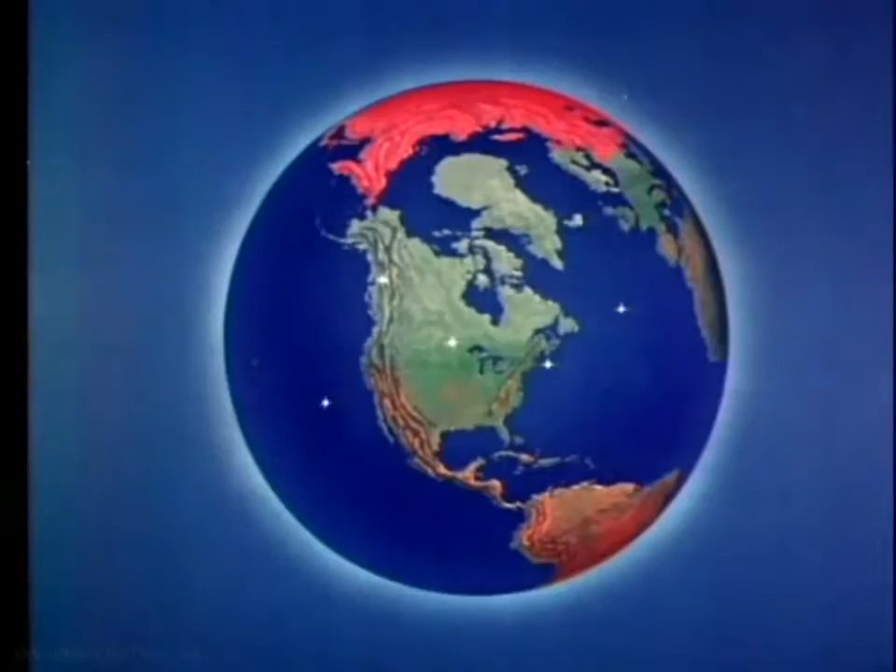Sprawled across North America, from the polar ice cap to the Mexican border, is a giant with 1,000 eyes. Day and night, fair weather or foul, he guards his homeland. This giant is the air defense system of North America, a vast and intricate maze of radar networks. Through the electronic eyes of this giant, we are able to see the enemy before the enemy sees us.

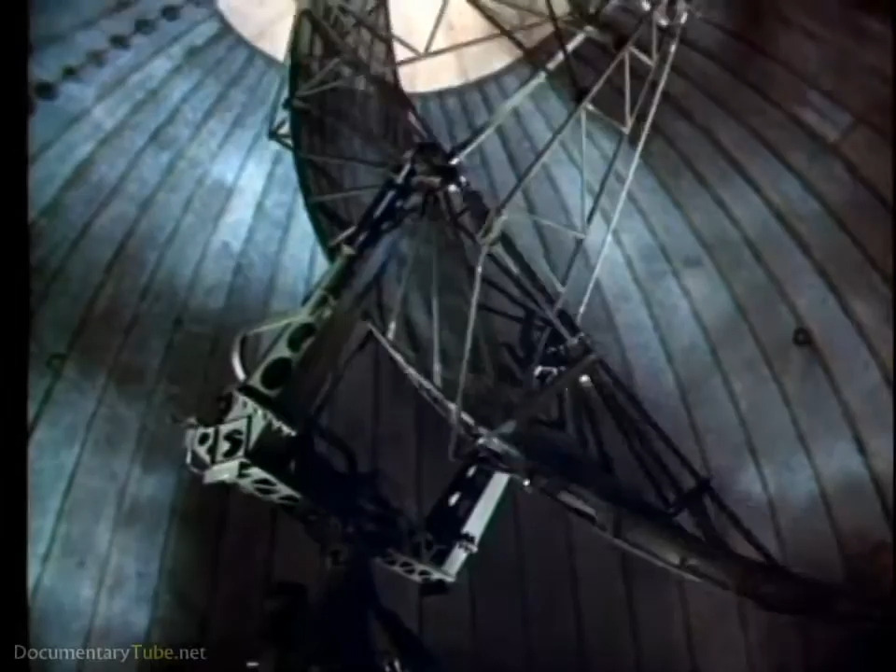These radars never sleep. Round the clock, they stand ready to do their part in minimizing the penetration of enemy bombers. And round the clock, their quietly pulsing hearts, the magnetrons and the klystrons, help generate the power for peace that keeps America strong.

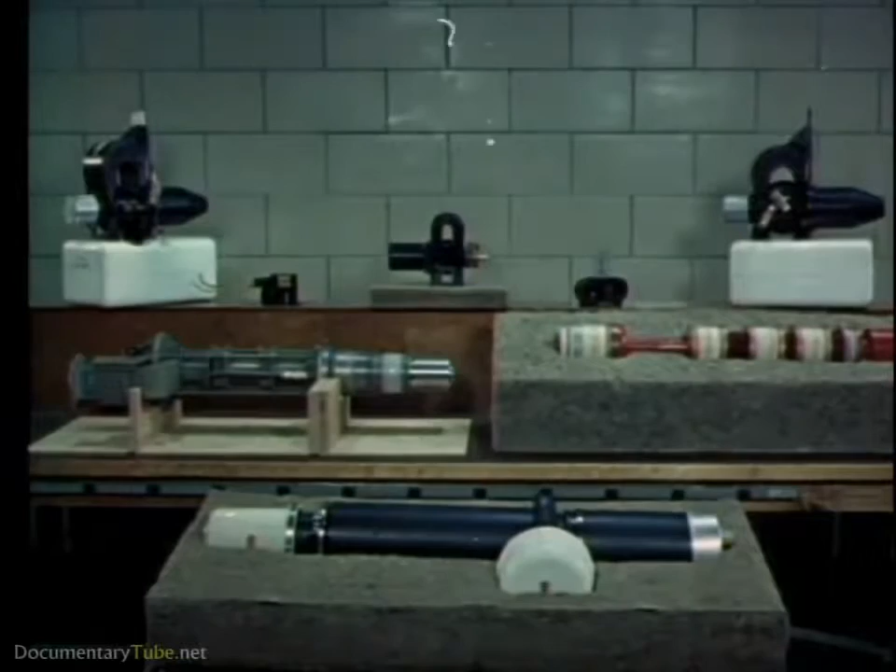These microwave power tubes, the magnetron to generate the radar signal, the klystron amplifier for radio communication, and radar are the subject of our story.

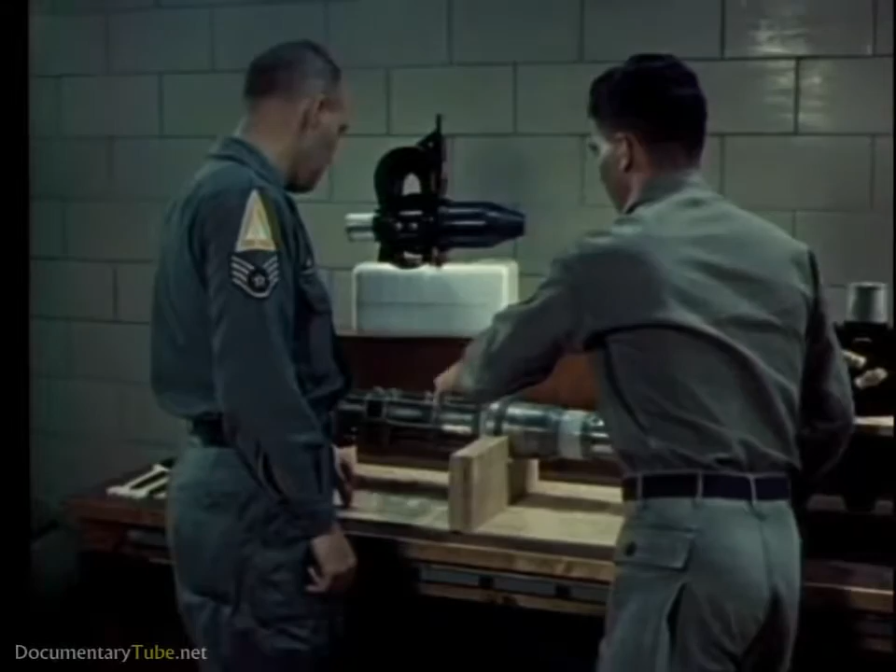It is a story about these vital tubes, but even more about you, the men who work with them. When you have a well-trained maintenance man with a well-adjusted radar at a well-chosen site, then you've really got a winning team.

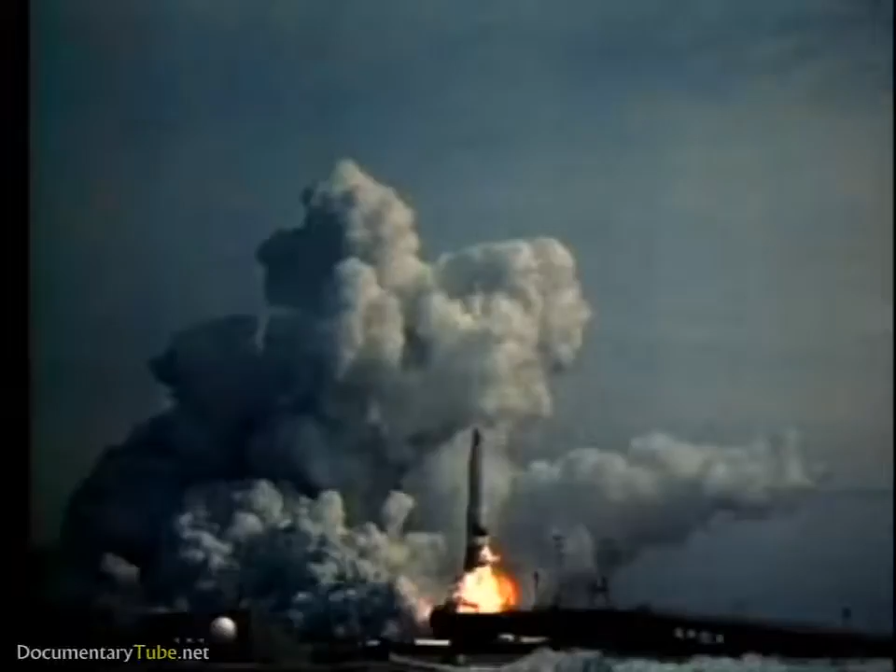They keep the airborne radars operating and ready for crucial missions. In missiles that depend upon radar for guidance. In bombers that depend upon radar for bombing and navigation. In interceptors that depend upon radar for fire control. And in reconnaissance and search aircraft that depend upon radar to extend their vision.

Years of scientific research and millions of dollars worth of equipment have gone into this aircraft. But only if the maintenance men keep the radar functioning can it complete its mission. When something goes wrong, they've got to make a quick decision, whether to attempt repairs in flight or abort the mission.

There's trouble here, that's for sure. But what kind of trouble? First, they check the radar scope presentation. Sometimes this gives a clue.

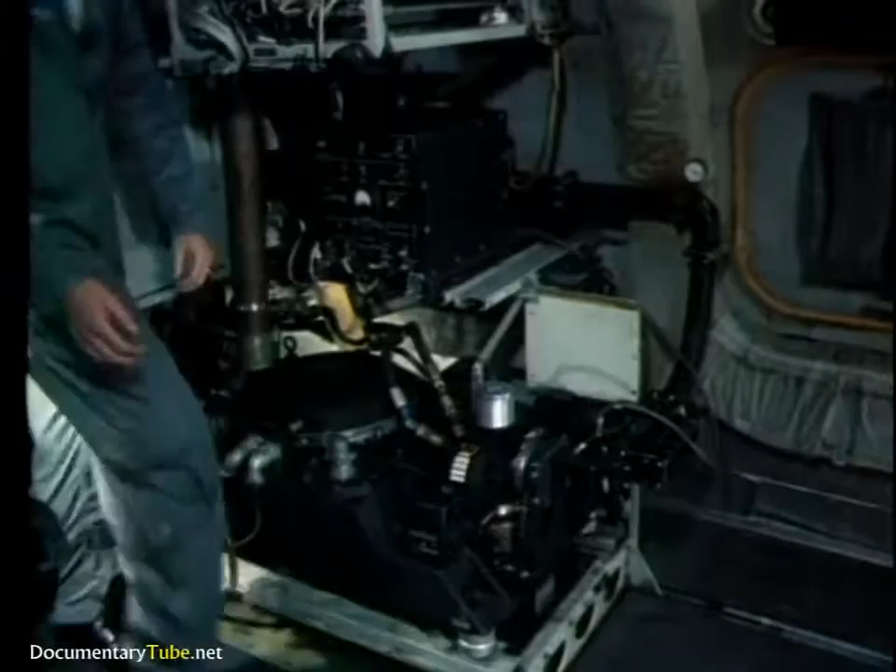The cause might be moisture in the waveguide, corrosion, dents, or scratches. Another trouble spot could be the pressurized antenna system. Loss of waveguide pressure will also cause arcing. Yes, the pressure's low. This is a danger signal. If this arcing continues, the magnetron output window may be damaged, the tube's vacuum lost, and the magnetron destroyed.

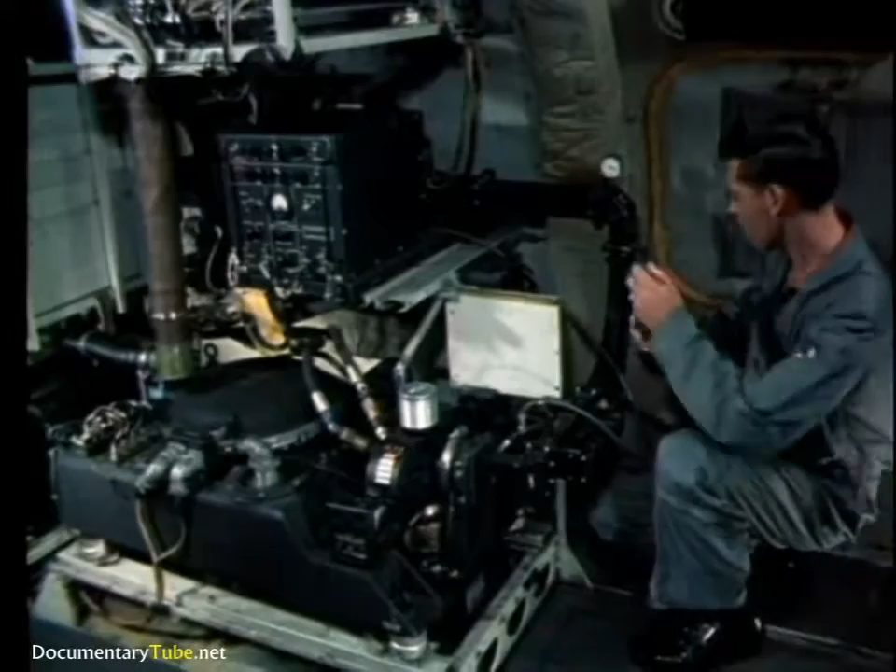Waveguide joints should be tested to make sure they're airtight. This man is making a liquid soap test. See where the bubbles are forming? He's found the trouble. But how serious is it?

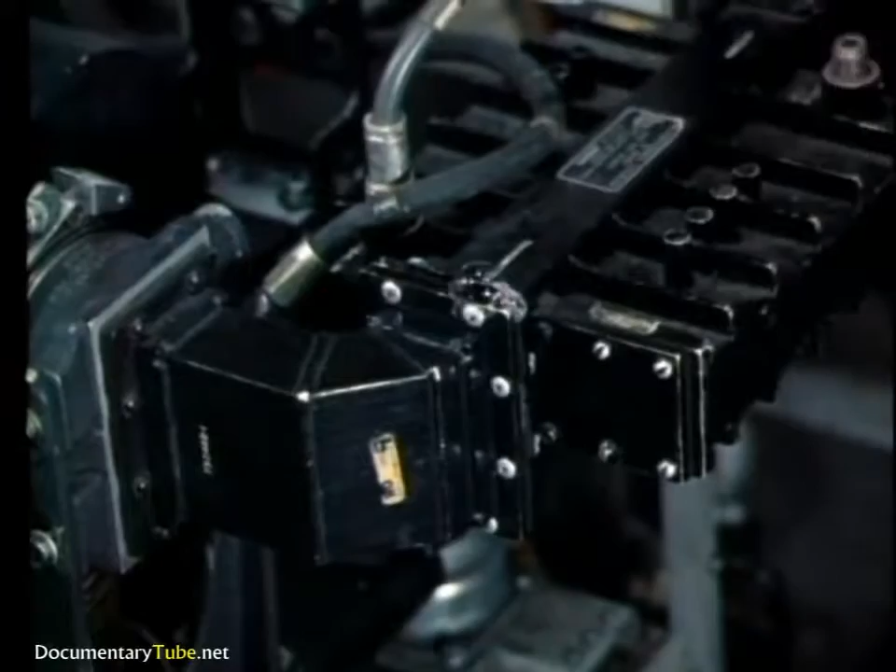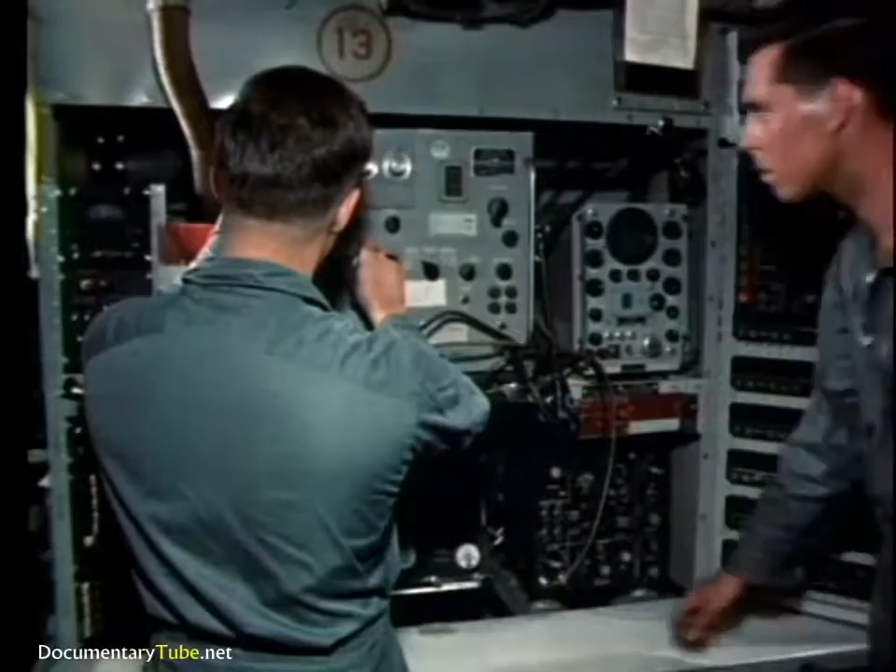He checks the spectrum analyzer again. It looks bad. See how the pulse has changed? Finally, the main pulse deteriorates completely. Bad news. The magnetron is seriously damaged. It's beyond repair. This means shut down the equipment and get ready to install the spare.

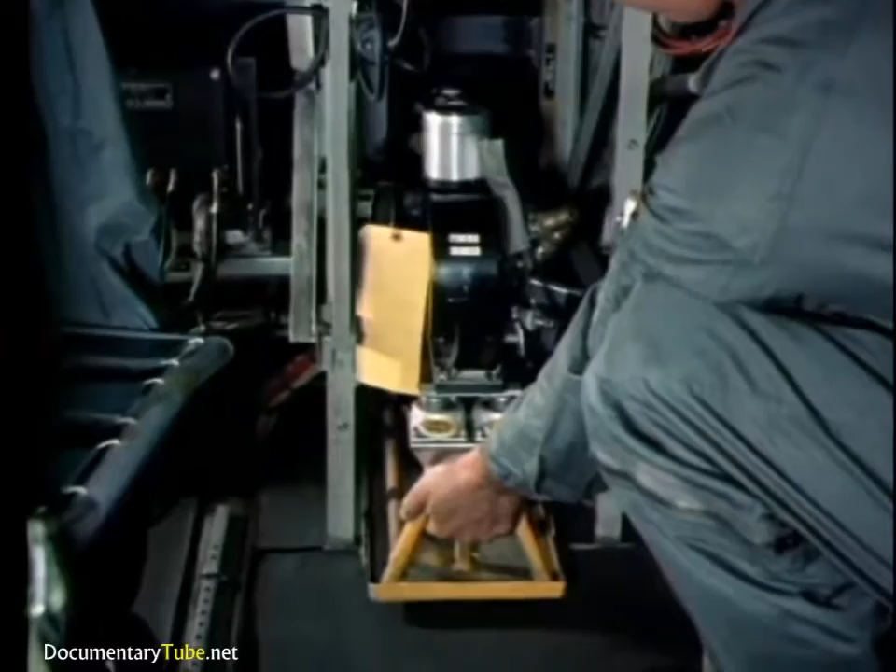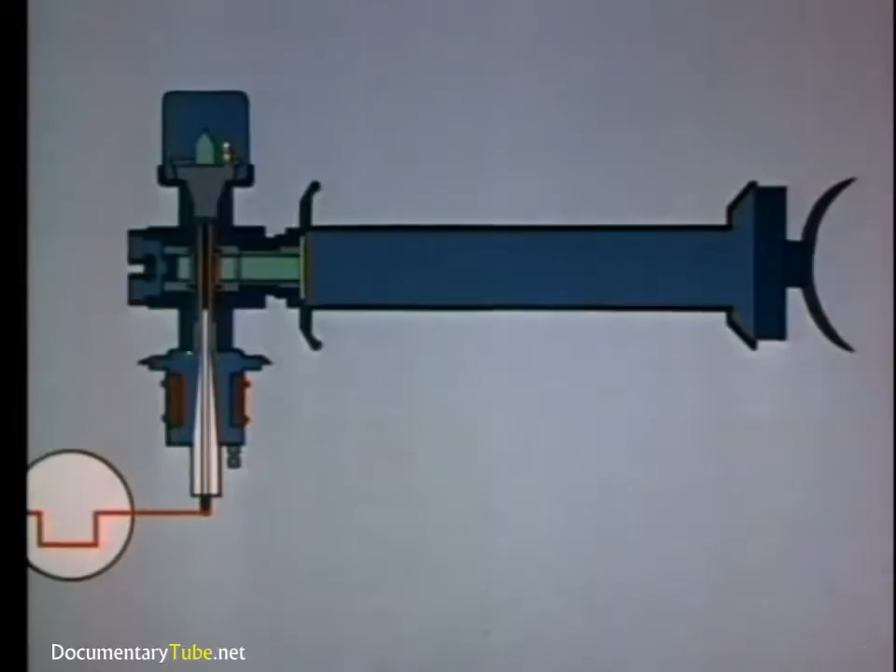While they're working, let's take a look inside the magnetron. Animation shows what caused the malfunction. We'll turn time back a few hours and show the Maggie functioning normally. As the pulse from the modulator is applied, the Maggie produces radio frequency oscillations to form the radar pulse.

This energy is then coupled into the waveguide and directed to the antenna for transmission. Energy is reflected back along the waveguide toward the magnetron. Normally, when the antenna system is in good shape, the reflected wave won't be strong enough to cause arcing at critical points.

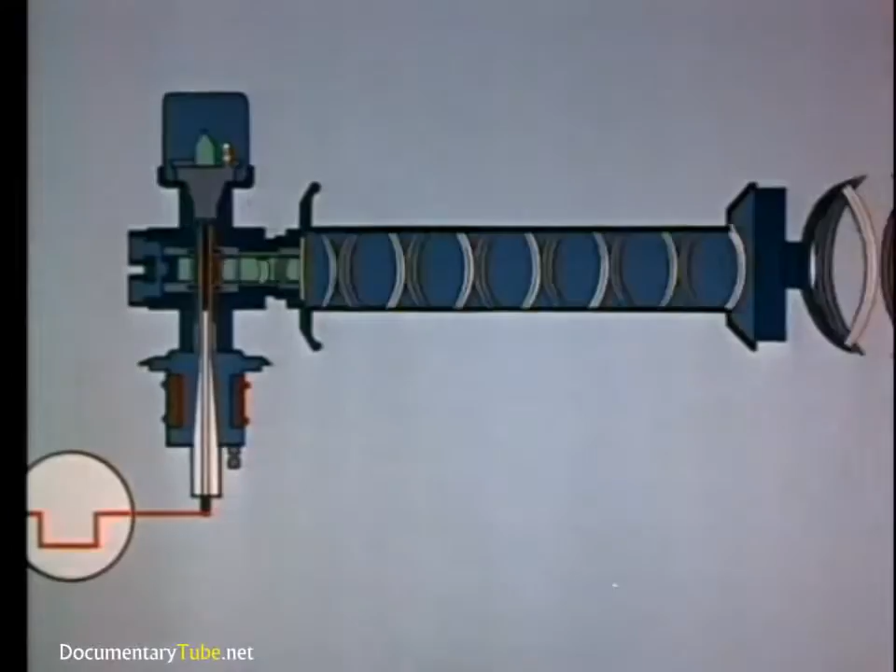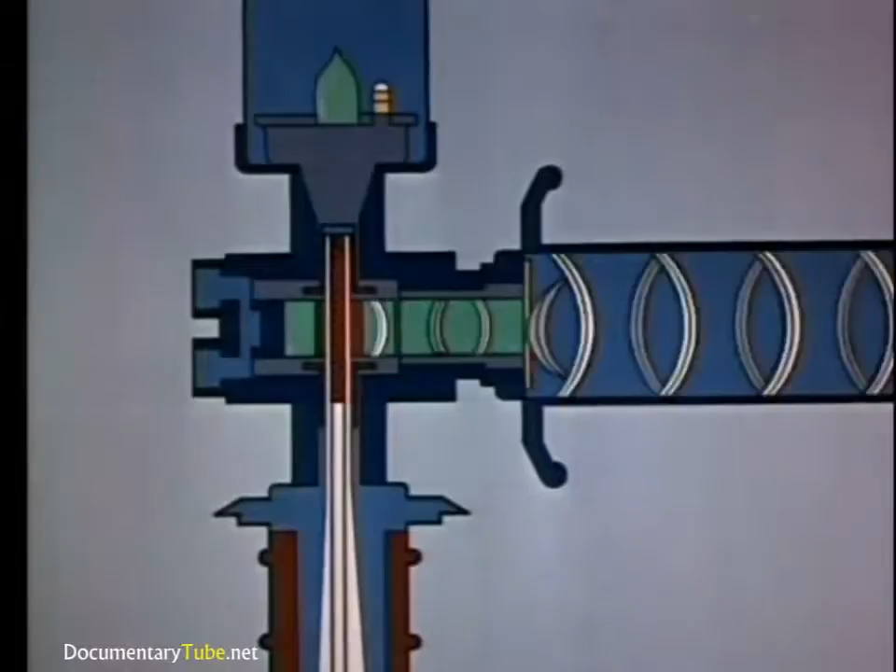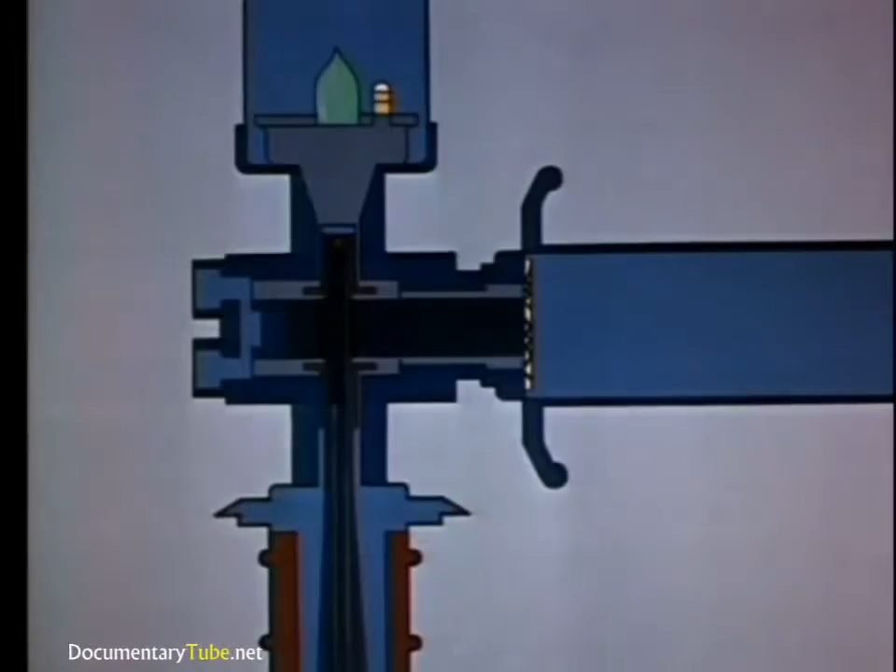But as conditions such as loss of waveguide pressure develop, the antenna characteristics change and the reflected wave becomes greater. Then arcing may take place at the point where the radar wave leaves the magnetron, causing the magnetron output window to crack or puncture. As the vacuum is lost, the heater oxidizes and burns out. The cathode cools. Air seeps into the interaction space, and arcing occurs with each pulse.

After the magnetron has been unbolted, the filament and cathode connections are uncoupled. A large magnetron like this one requires 2 men to handle it safely.

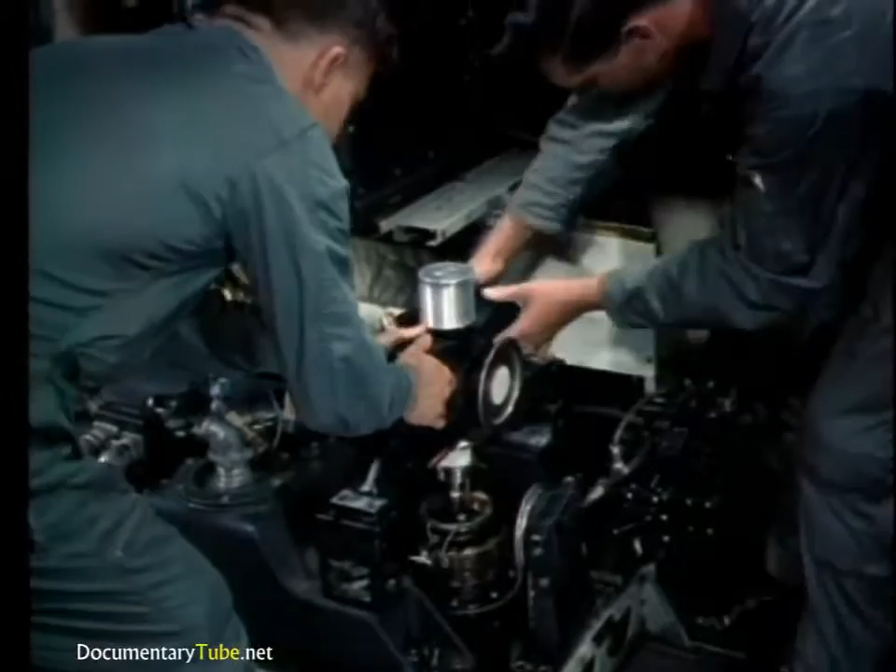Before a Maggie is replaced, all connections, mating flanges, and sealing surfaces should be inspected. Insulating oil should be examined for foreign matter. Damaged or worn gaskets should be replaced.

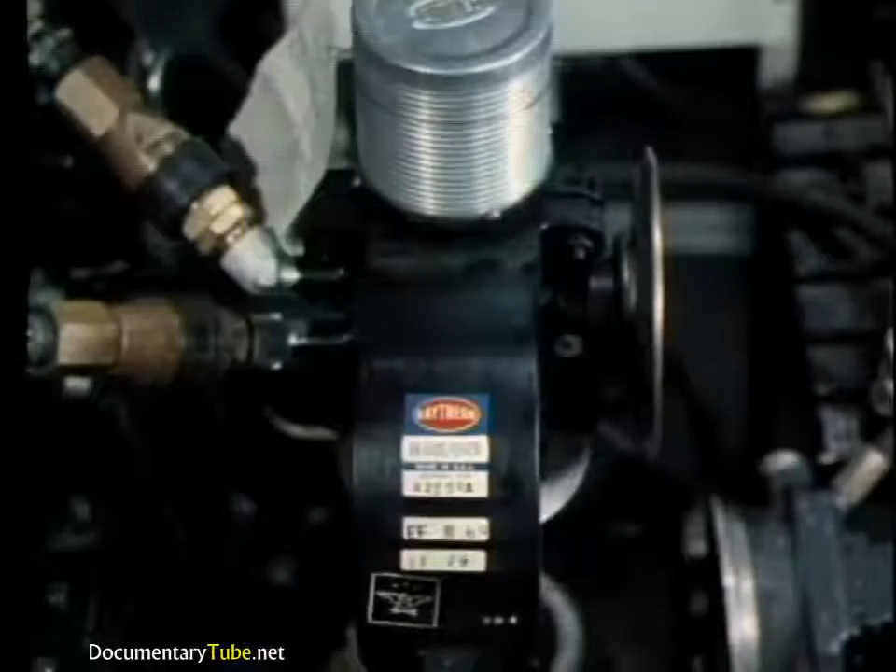Heater's supply voltage should be established at the value marked on the tube. Later, when the plane returns to base, the heater voltage should be double-checked with an accurate instrument.

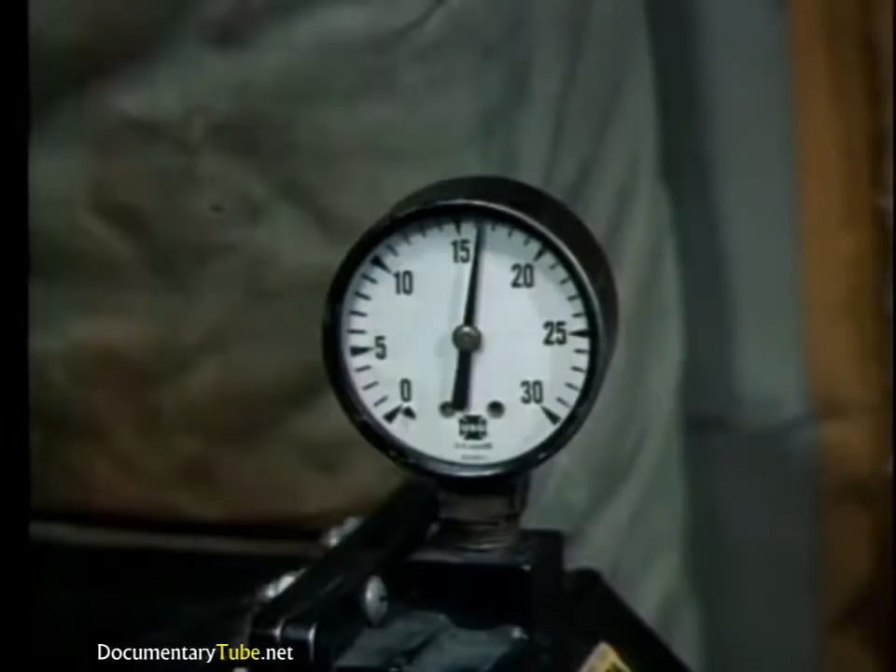Now that the spare magnetron has been installed, further tests are necessary. The technician must make sure he has the required pressure and that there are no air leaks. Instructions concerning the care of pressurized antenna systems will be found in the appropriate tech order handbook. The liquid soap method is a simple way to check for pressure leaks and may be used where more accurate means of testing are not available.

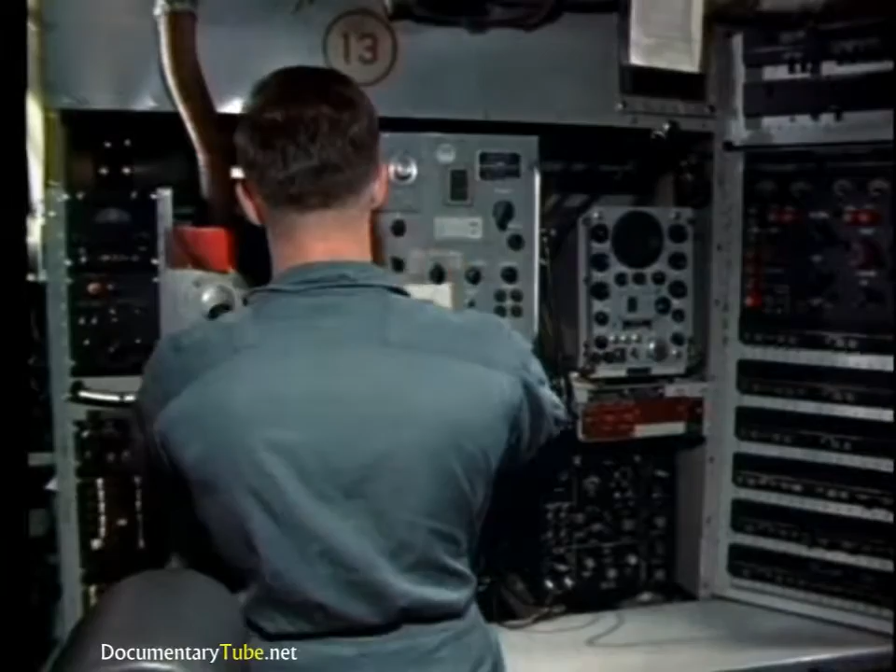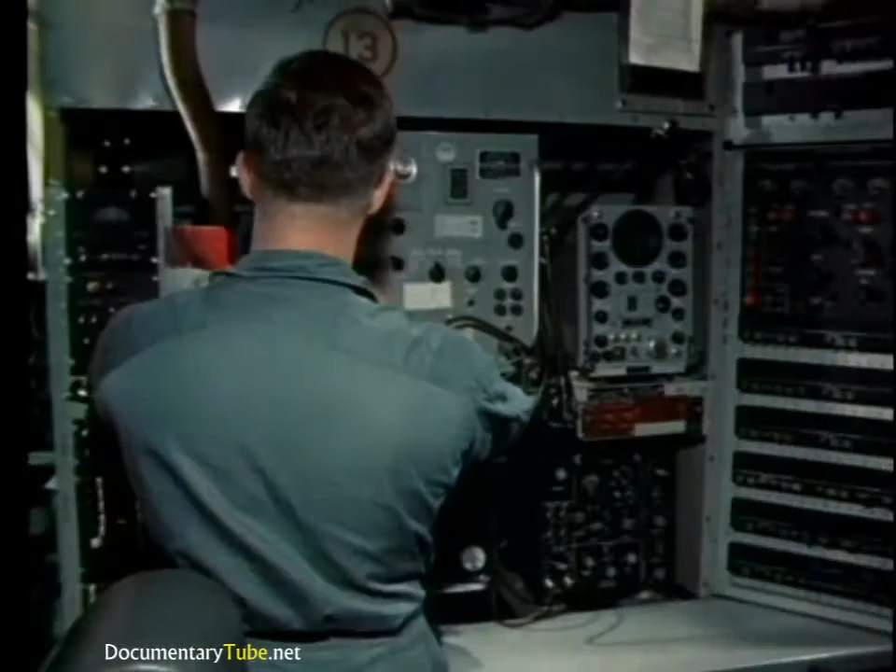Test equipment is used to analyze the performance of a newly installed tube. The output pulse is checked on the spectrum analyzer. See how the large hump or main bang is symmetrical and sharply defined. The side lobes are relatively small. A presentation like this means that the Maggie is firing properly.

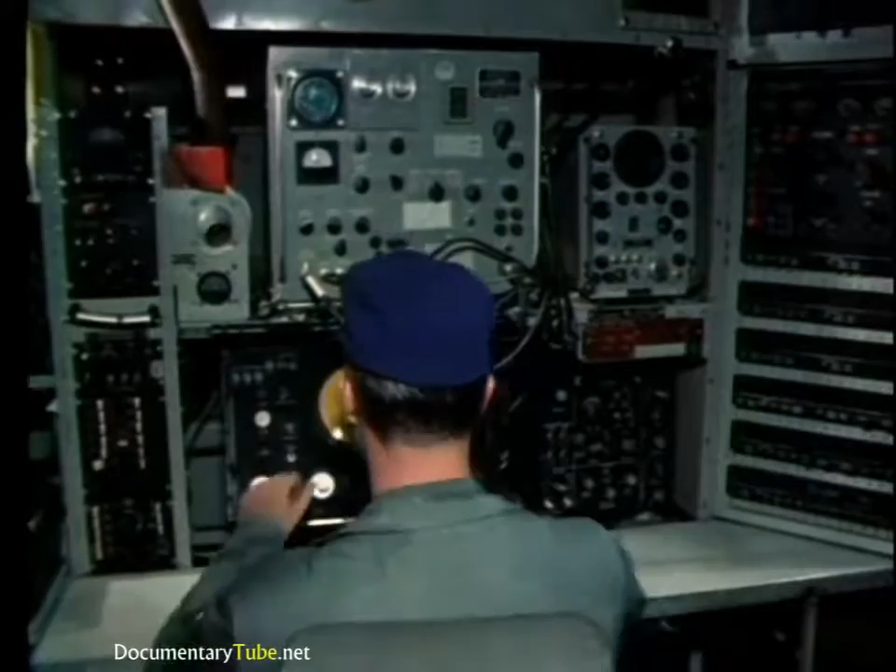Not only that, it means that these technicians know their jobs. They were able to analyze the trouble correctly and replace the magnetron in flight. Because they knew what to do, this aircraft was able to complete its mission.

Let's take a closer look at these microwave power tubes. Magnetrons costing from $100 to $10,000.

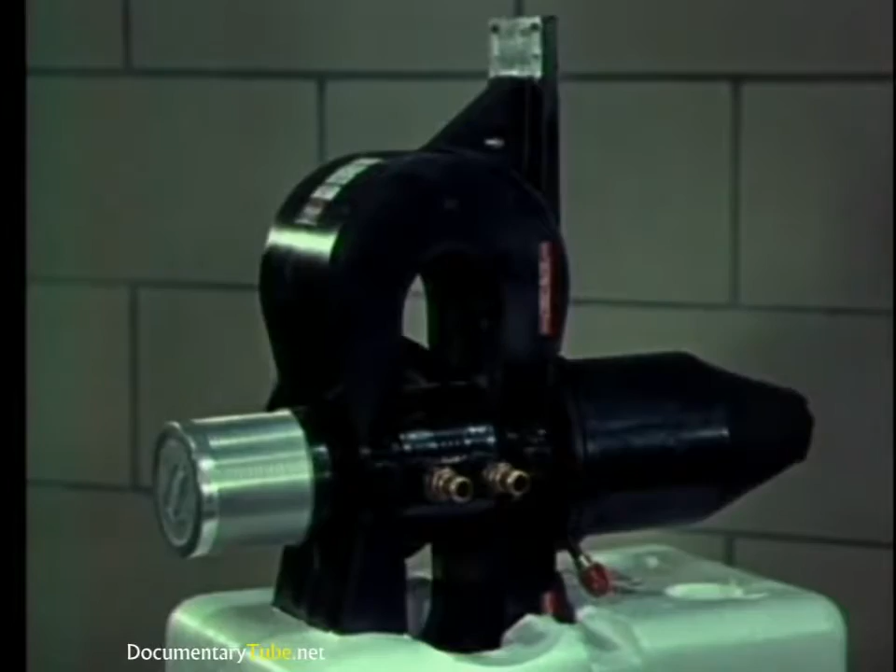Klystrons costing from $1,500 to $25,000. Why so expensive? Let's see what's inside them. Look at this. Parts so critical, they must be inspected through a microscope.

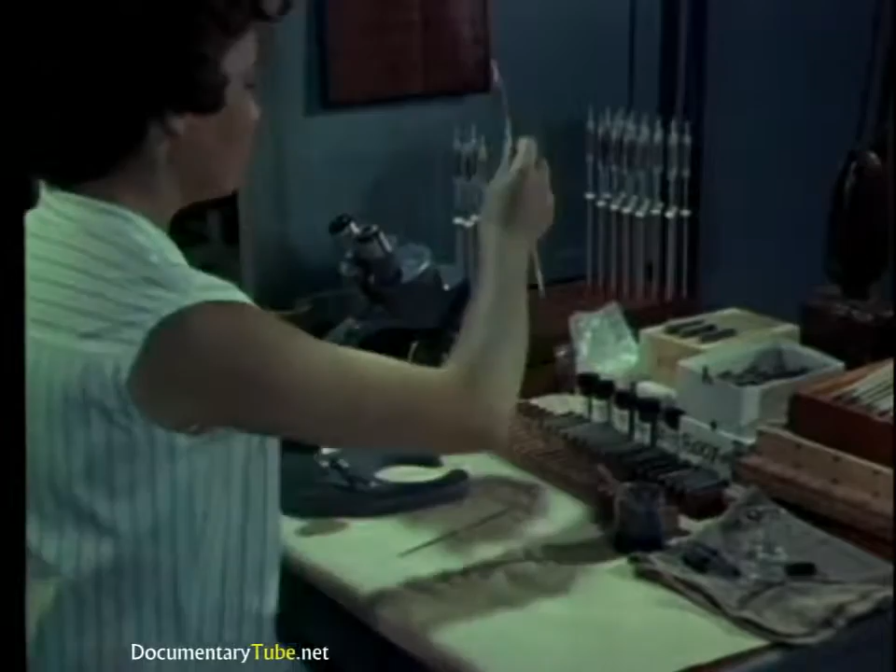Tolerances accurate to 4/1000ths of an inch. To build them to such close tolerances requires involved manufacturing processes. Specialized parts must be carefully assembled.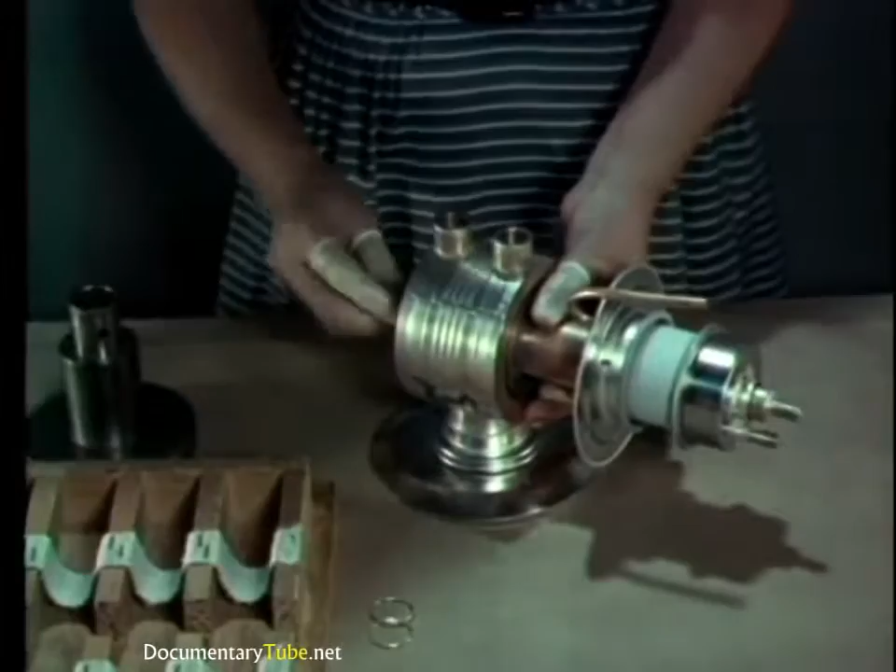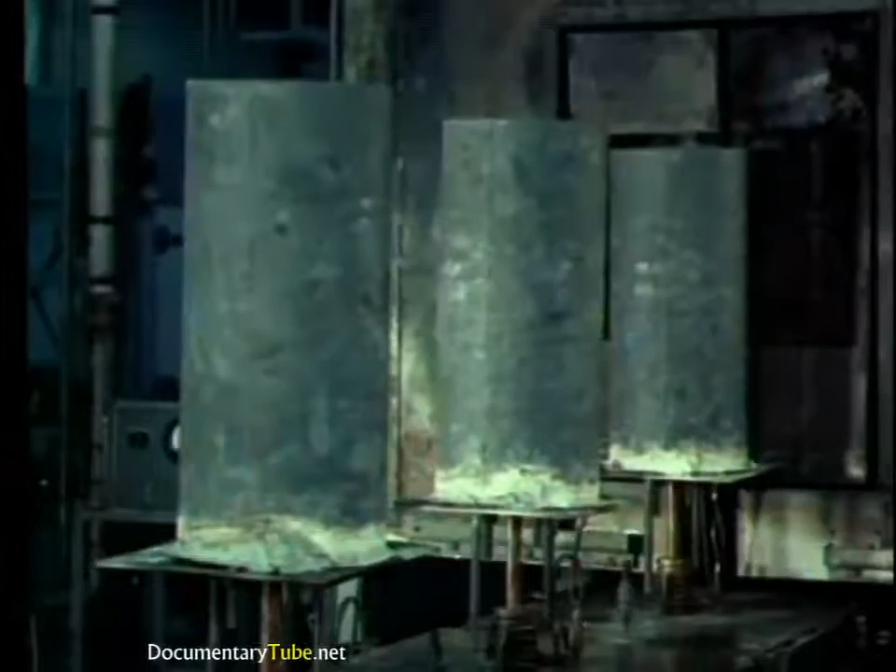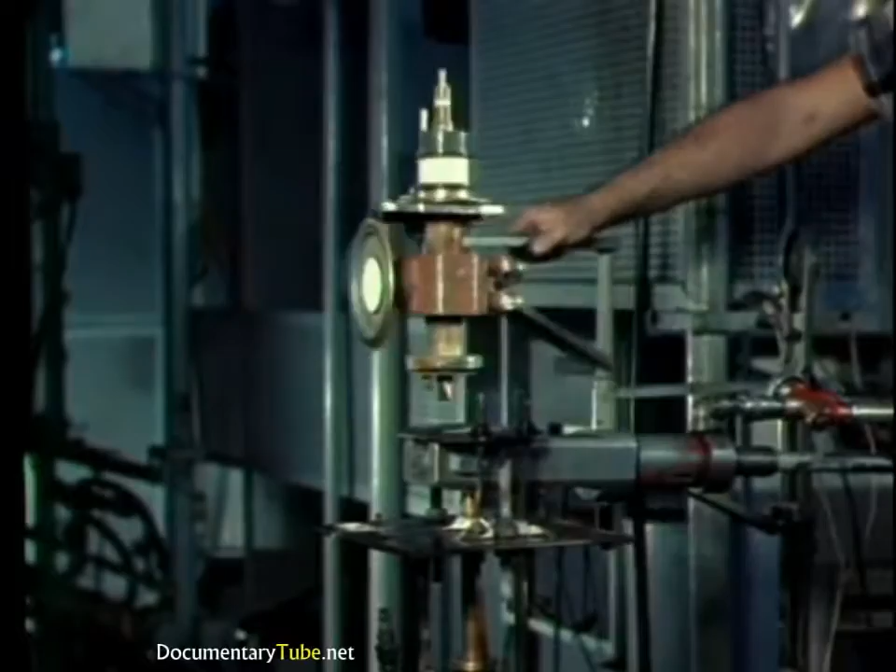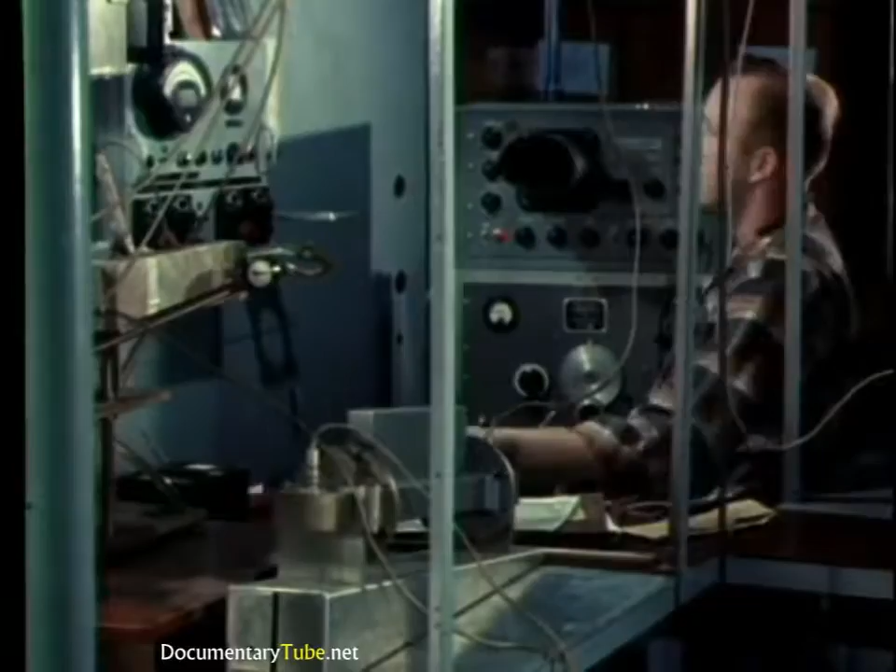The completed assembly is heat treated to bake out gas molecules, so that they may be removed by an evacuation machine. External mechanical parts, such as couplings and magnets, are installed. The final step is rigid testing of electrical performance to make sure it meets the high standards required.

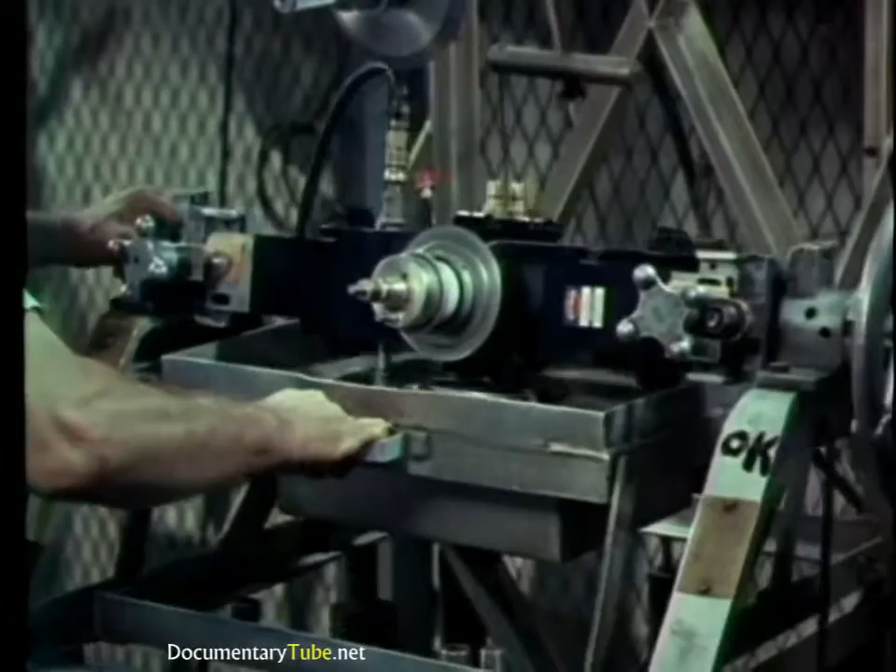Pressure tests ensure leak-proof connections throughout. Now the tubes can be put into storage. Even here, should tiny defects develop while on the shelf, continuous sample testing will reveal them. Before shipment, the delicate tubes are carefully packaged. The quality designed in during research, built in during manufacture, maintained by rigid testing and careful storage, will reach the user intact.

Here are a few basic rules on proper handling. Always use 2 men to lift a heavy tube. A portion of a carton makes a good tube stand, protecting delicate parts from damage. But a wooden rack is better and lasts longer.

Save all the cartons and packaging materials. Use them to return defective tubes to the factory.

Magnetrons should be separated at least 12 inches, then their magnetic fields won't interact. Don't store them on steel shelves or they may be degaussed. Don't use steel tools. Use non-magnetic tools. Following these simple rules will save time and trouble, prevent damage, and save the Air Force many thousands of dollars each year.

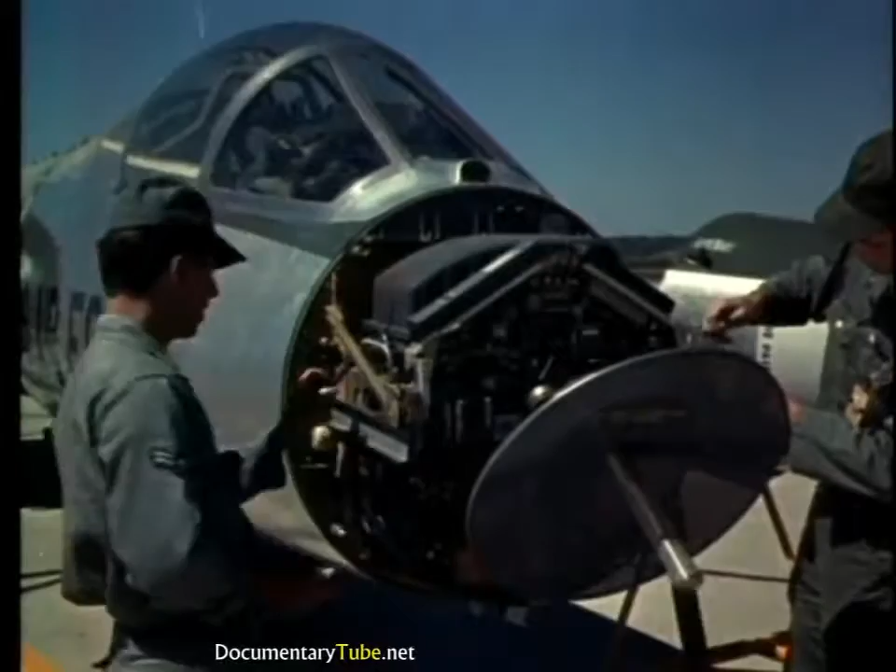On most of the smaller high-performance aircraft like this one, it is not possible to do in-flight radar maintenance. Therefore, most of the work must be done in the electronics maintenance shop. This aircraft has just aborted an intercept training mission. The reason: radar malfunction. Had this mission been the real thing, an enemy bomber could have broken through our defenses.

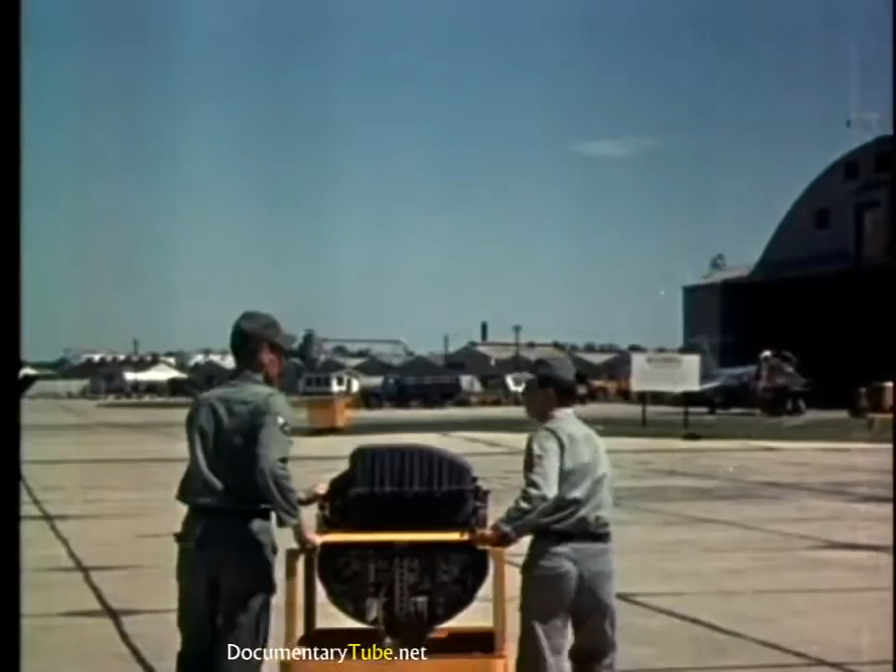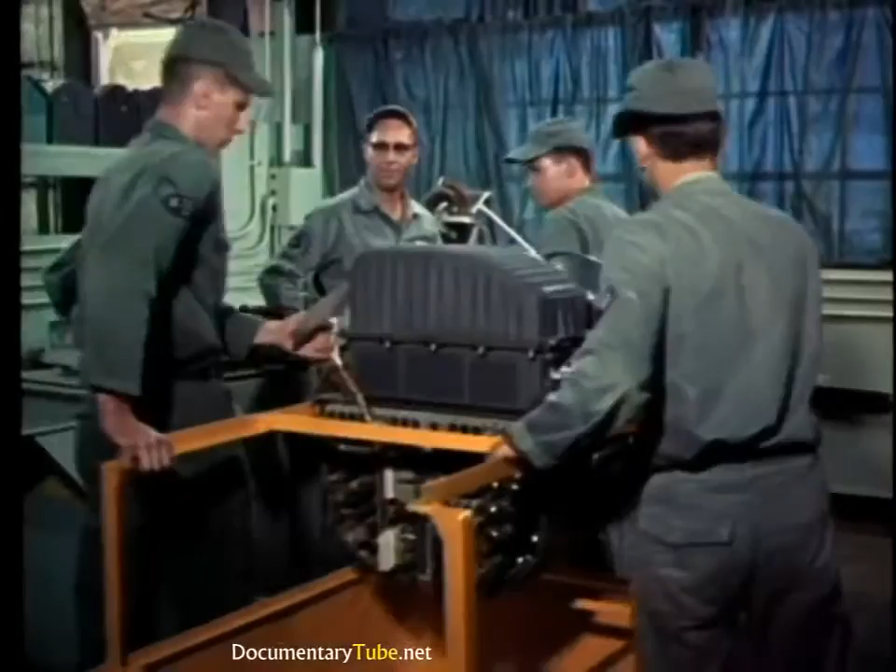The maintenance man's job is to find out why the radar malfunctioned and correct the trouble. You'll see that although these radars come in smaller packages than those on larger aircraft, they are just as big a maintenance problem. The maintenance supervisor is in charge of this work.

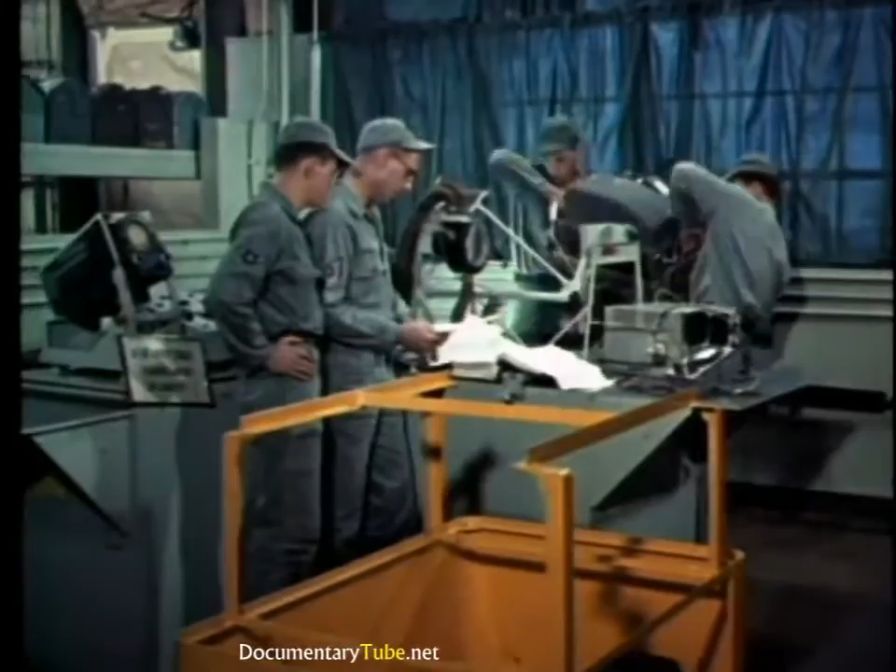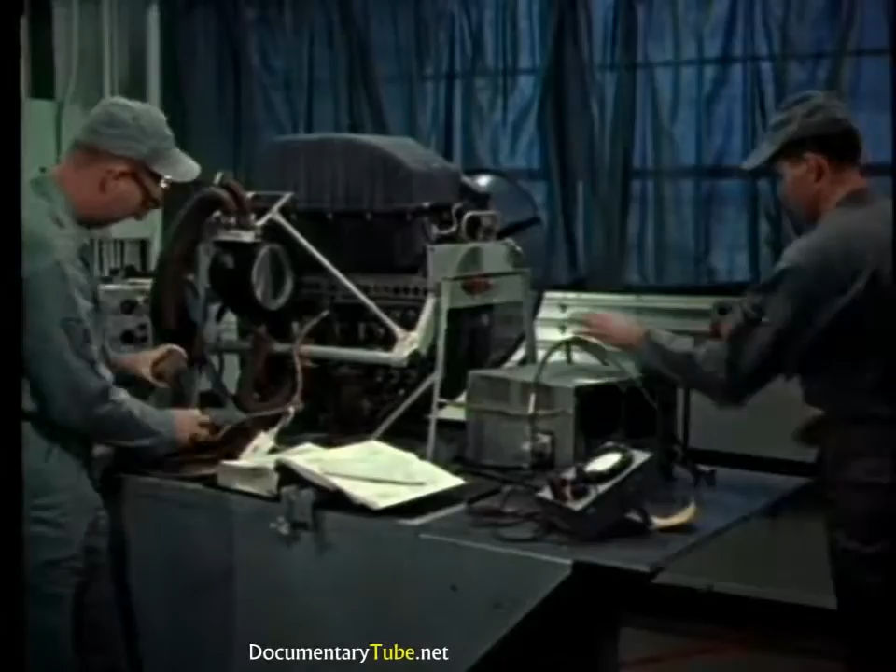Before teardown of a defective black box is started, the operational defect should be identified or at least isolated to a particular sub-chassis. The pilot's report on the radar failure may give a clue. Comparing the report of malfunction with equipment handbooks may also help to isolate the defect. But the best aids to repair are the analytical approach of the technician and the special test equipment he uses.

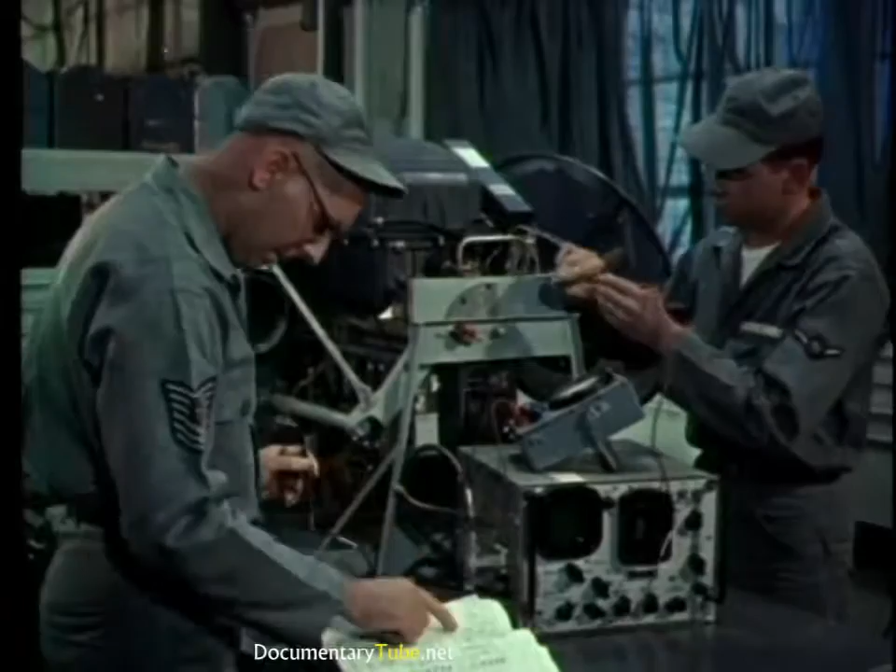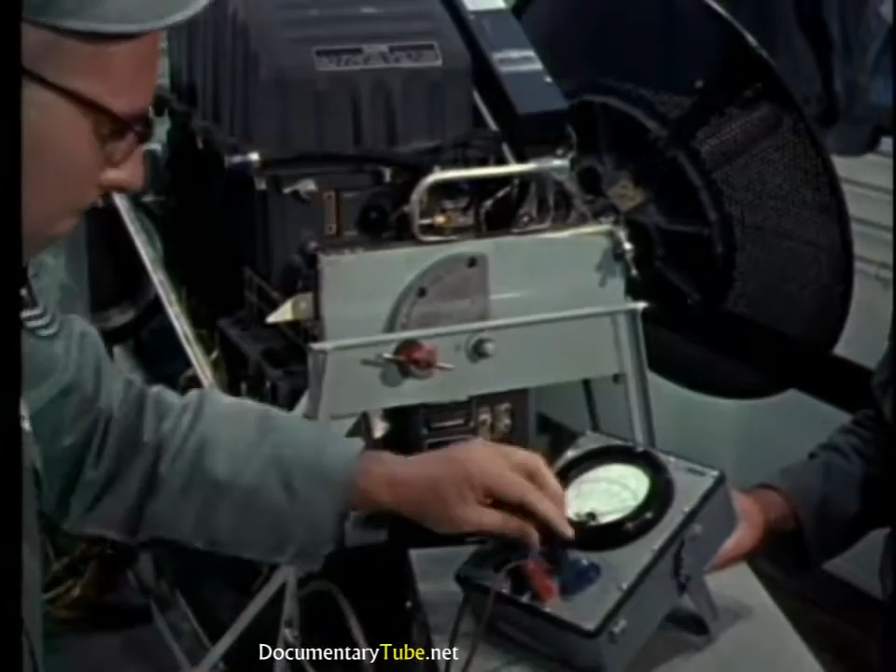An important point to remember is that the transmitter malfunction may be caused by parts other than the magnetron. Wherever possible, other circuit components should be checked before power is applied. A simple resistance check will often reveal a short circuit. That's what the trouble is here.

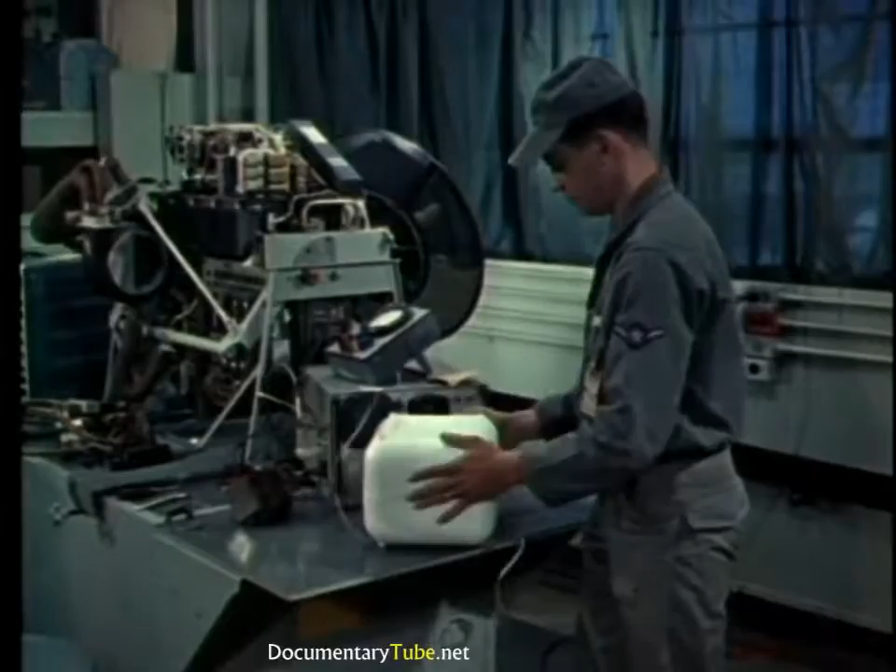The airman will carry on from here and trace the short circuit. So far, so good. He's found a shorted filament transformer and replaced it with a new one. But what's this? He's decided to change the magnetron, too. The supervisor disagrees. Tube swapping is not a good idea.

The old magnetron should be thoroughly tested before any decision is made. Testing showed that the old magnetron should be replaced. This has been done. Now let's see how the new Maggie behaves. This is confusing. The spectrum analyzer shows arcing.

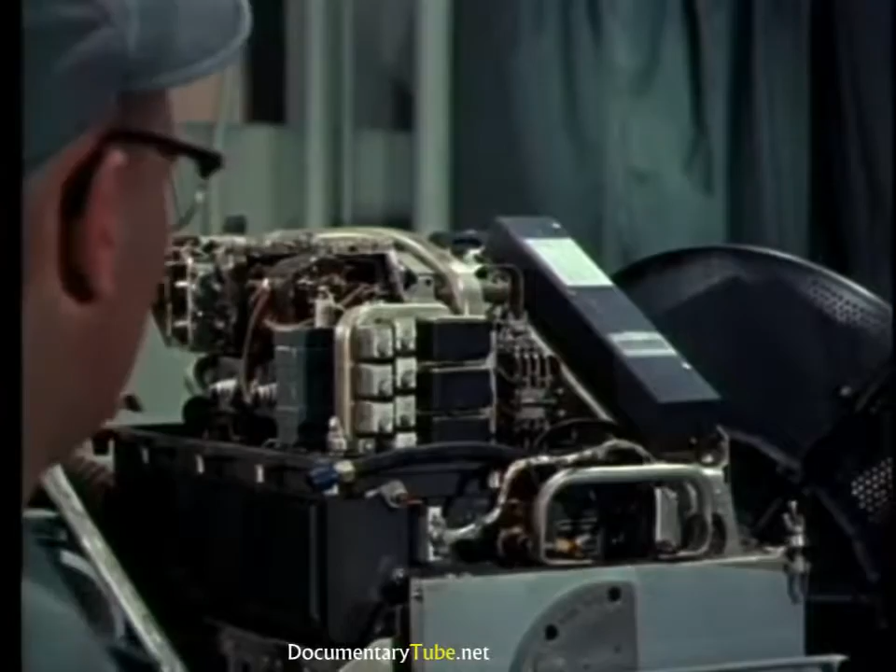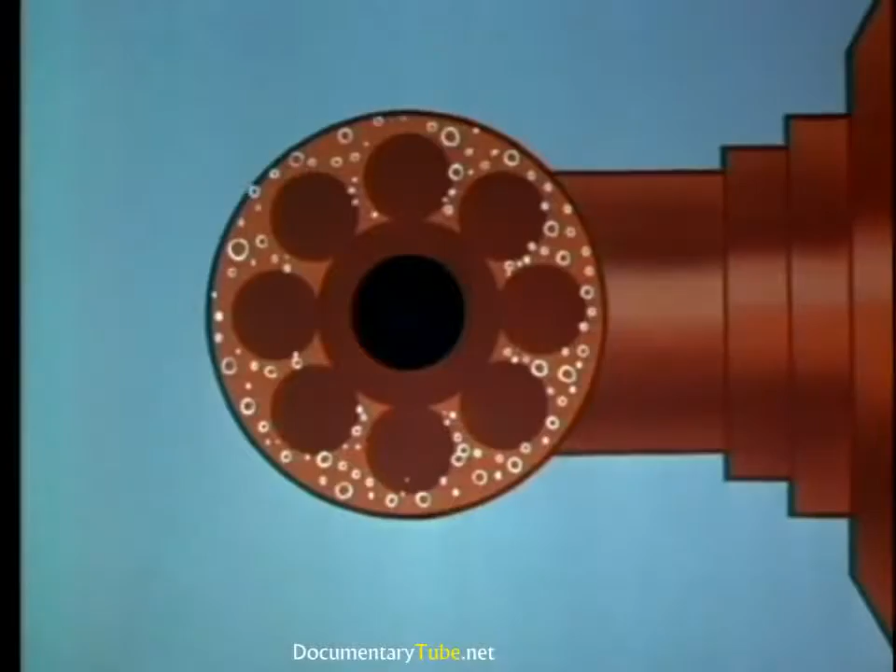Let's look inside the tube and see what's causing it. Magnetrons are made of porous metals, which usually trap a small amount of residual gas. During storage, gas molecules migrate into the interaction space surrounding the cathode.

When the tube is installed and power applied, it will operate normally if the gas content is low. But if gas content is high, arcing will occur with each modulator pulse. This arcing might be mild or severe. Frequently, tubes with residual gas can be restored to normal operation by a suitable break-in or seasoning period.

During break-in, the gas molecules are driven back into the walls of the tube, and normal operation resumes. If the equipment is operated frequently, normal operation should continue throughout the life of the tube. Occasional individual arcs may also be noted in a normal tube which does not contain gas, but this behavior is due to transient conditions and should be considered as normal.

All new tubes which display arcing when they are first installed should be thoroughly tested and analyzed before being discarded. This will save the government both time and money.

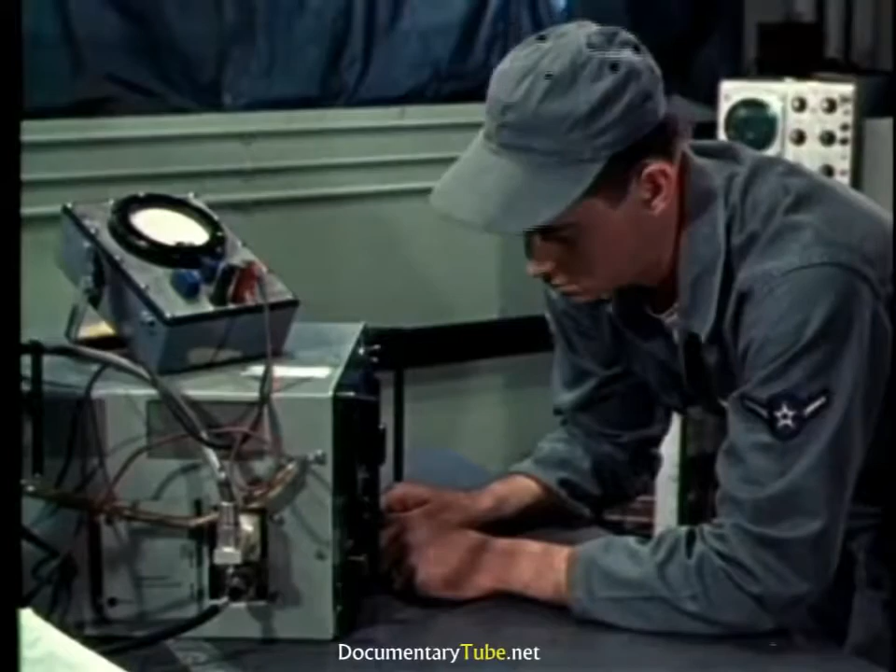The repairs are finished. Now comes the break-in procedure. Proper break-in can clear up various degrees of internal arcing. But watch the spectrum analyzer carefully. If frequent arcs occur, switch to standby immediately.

Small magnetrons may be damaged if severe arcing is allowed to continue more than 2 seconds. Now the range selector switch must be changed to short pulse before the magnetron is operated.

If only sporadic arcing occurs, the operation may be continued. But a series of arcs may cause the overload to pop. In this case, reset the switch and continue the break-in.

To avoid possible damage during the break-in, the technician should keep a close watch on modulator tubes and other components of the RT unit. The time required for break-in will vary with the tube, conditions, and methods used, but normally break-in can be accomplished in 20 to 60 minutes. When break-in is complete, and only infrequent arcs or misfirings occur, operation may be regarded as normal, and the equipment made ready for service.

In addition to the airborne radars, there are a great many ground radar sites scattered about the continental United States and Canada. They are found in almost every type of American scene: in the dusty expanse of the plains, in the northwoods, the heat and humidity of the deep south, in the rolling farmlands of the Midwest, and the salt water scenes of our coastal areas.

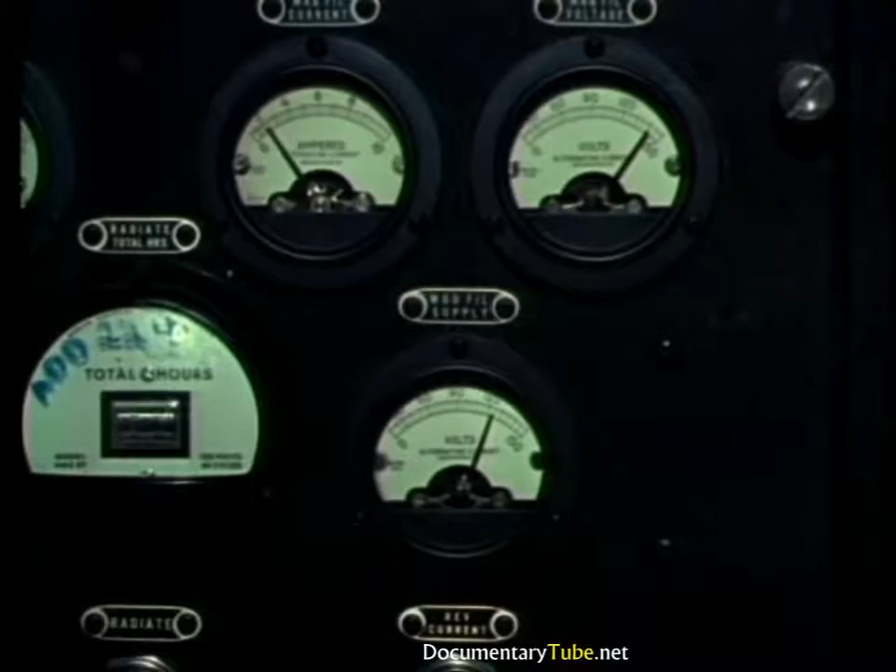Something caused this radar to quit. What was it? Sometimes the meters will tell the story. The filament current has dropped to zero, and the filament voltage is too high, indicating that a portion of the heater element is open. A quick, careful analysis has to be made.

Here is where maintenance skill and training pay off. The question is, has the magnetron become inoperative because of heater failure? Or is there another cause?

Yes, here's something. The insulator is pitted. High-powered magnetrons like this one have insulator bushings immersed in oil. It might be that the insulating oil has broken down. Better check this.

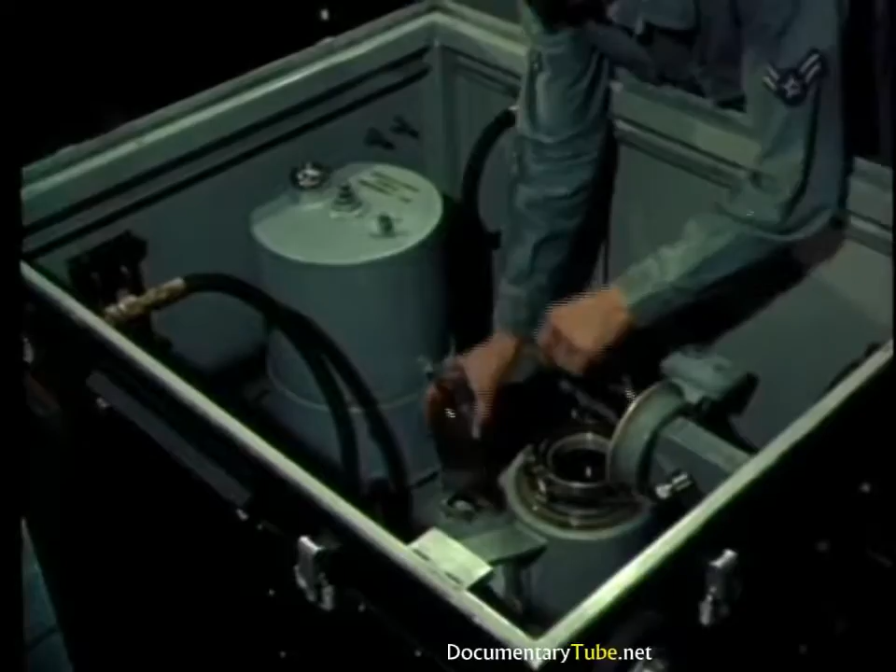Here's the answer. Contaminated oil. The oil failed to insulate. Oil can break down after long exposure to heat and high voltage. Oil may also be contaminated by dust, moisture, metal particles, or air bubbles.

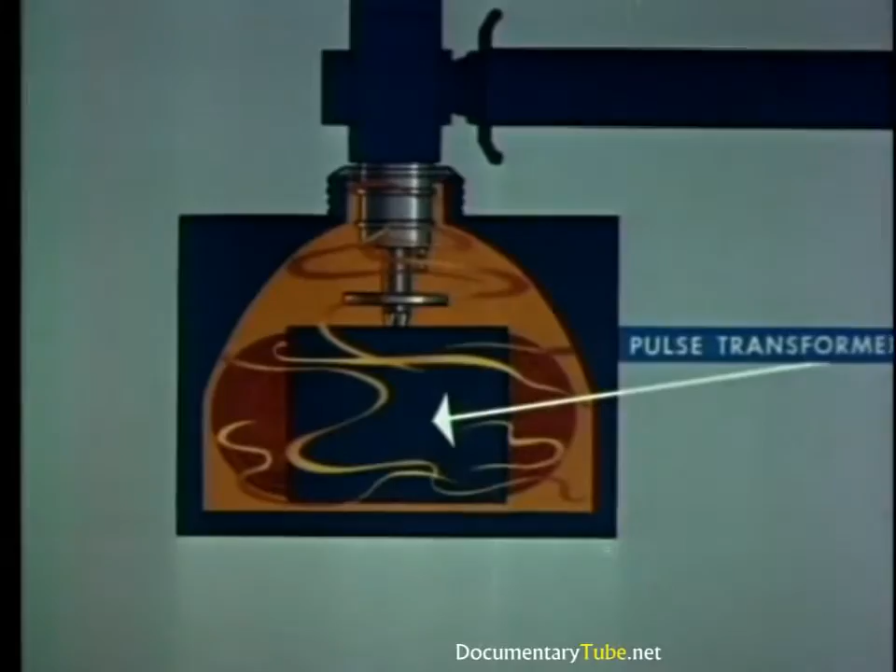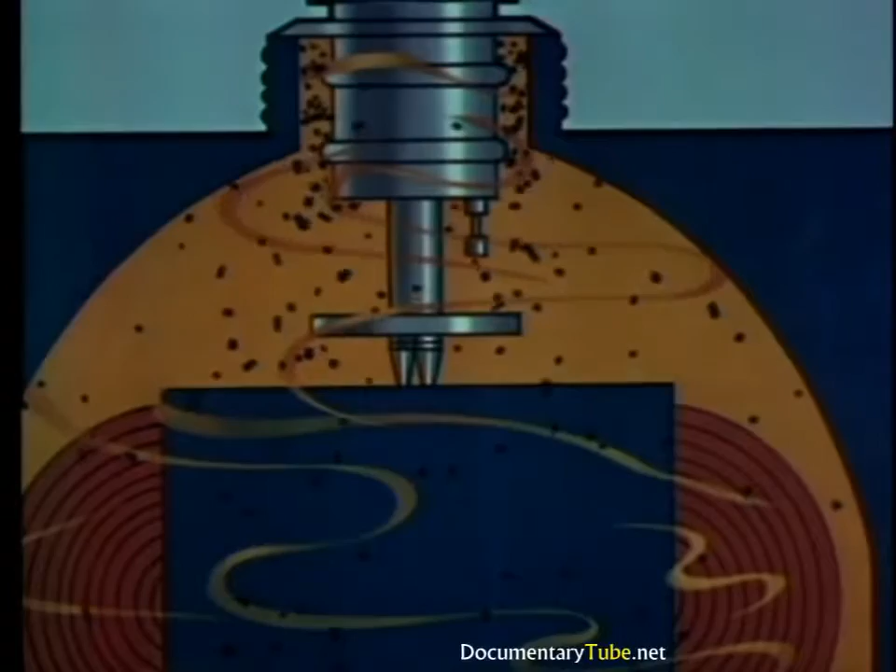Here is how contamination breaks down oil. As contamination accumulates in the oil, current paths are created between high voltage terminals and ground. As the condition becomes worse due to increase of contamination and change in oil structure, a definite high voltage path for corona discharge is created in the oil. The corona discharge begins to erode the surfaces of the insulator. As the insulators are penetrated, the vacuum in the tube is destroyed, and the tube is damaged beyond recovery.

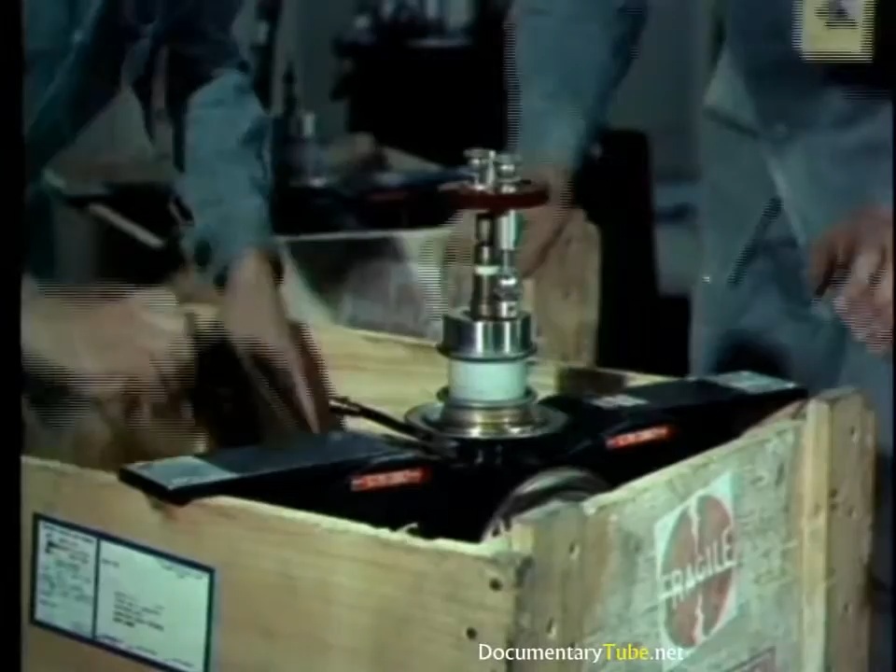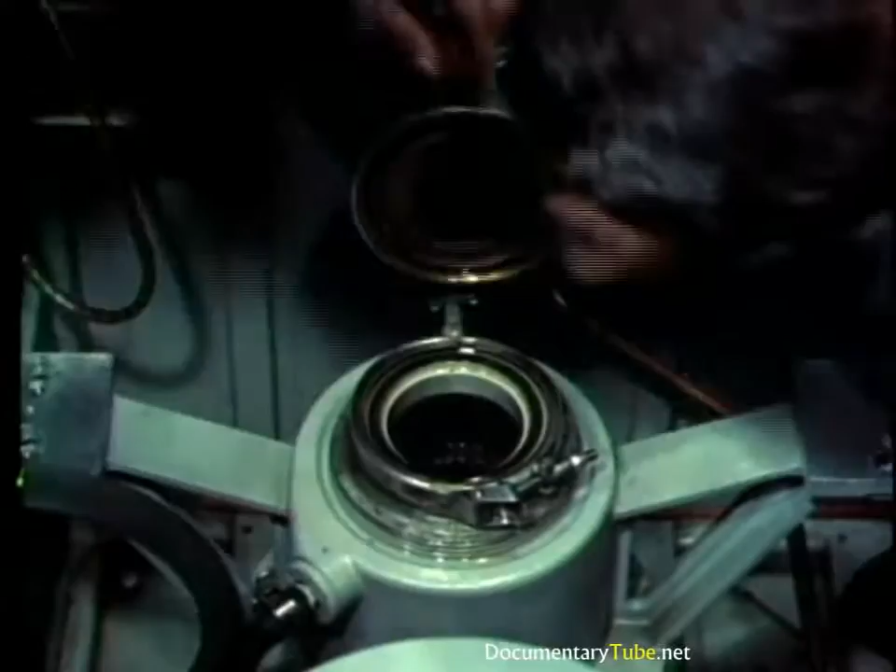The maintenance men have completed oil replacement using all precautions to prevent contamination. They have checked the grade of oil against tech orders and factory instructions. But before installing the new Maggie, all mating surfaces and flanges must be inspected and cleaned or replaced as required. It is also necessary to check waveguide parts, replace gaskets, coolant hoses, oil fittings, and so forth.

Be sure all electrical connections are secure. Careful, watch out that terminal doesn't hit the cabinet. That could ruin the tube.

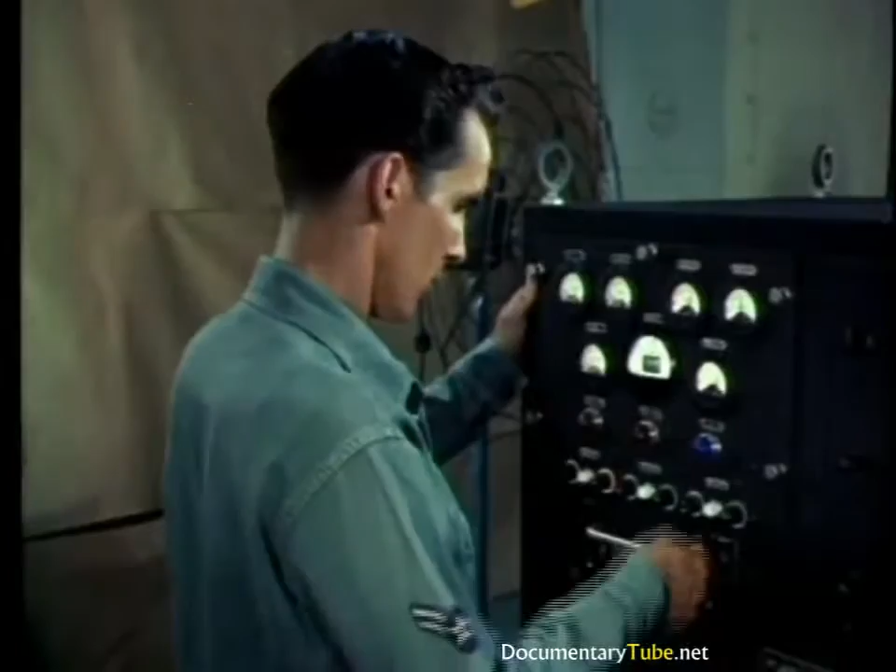Make certain that all clamps, bolts, coolant hoses, and so forth are secure before operating the tube. All set? Okay, hit the power button. Uh-oh, that one didn't last long.

There are many reasons why new tubes may fail to function properly. One of the primary causes of tube failure is damage sustained during transportation and handling. This damage may occur during shipping or in the depot, or during Air Force distribution to the base.

Here is what actually happened to that new tube which failed to operate. Nobody saw it happen. Nobody's going to tell, and nobody's going to get the slightest use out of that magnetron. But these men don't know this Maggie fell off a truck. They just know it won't work.

Could it be something wrong with the rest of the equipment? A short circuit? A bad connection? Or should they pull out this Maggie and install another?

They've installed another new Maggie. They've also followed correct procedure, allowing the heater to warm up 5 minutes before applying power to the anode. Ah, it works.

Let's look inside a typical two-cavity power klystron and see how it operates. The beam current is emitted by a heated cathode and passes through the drift tube sections.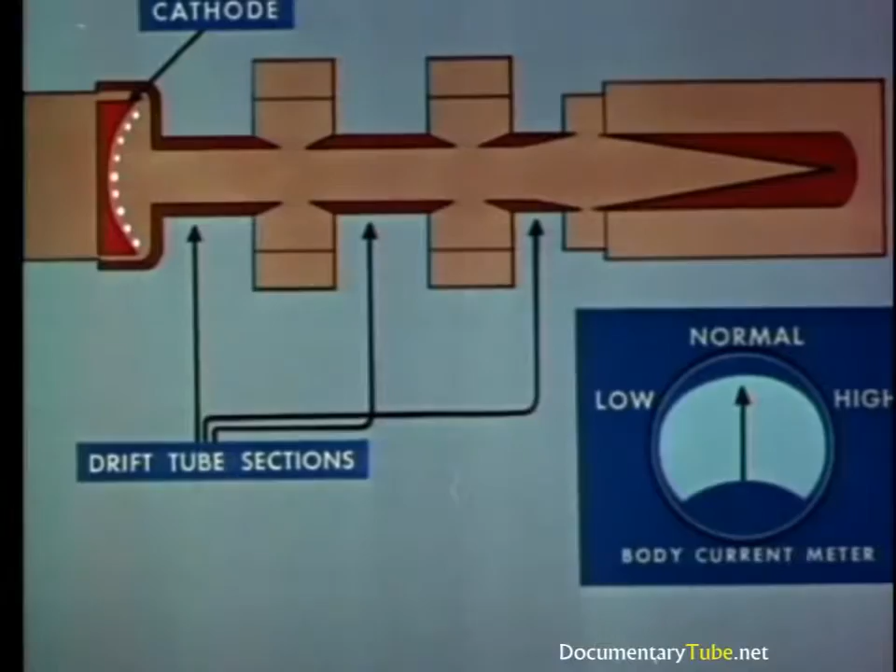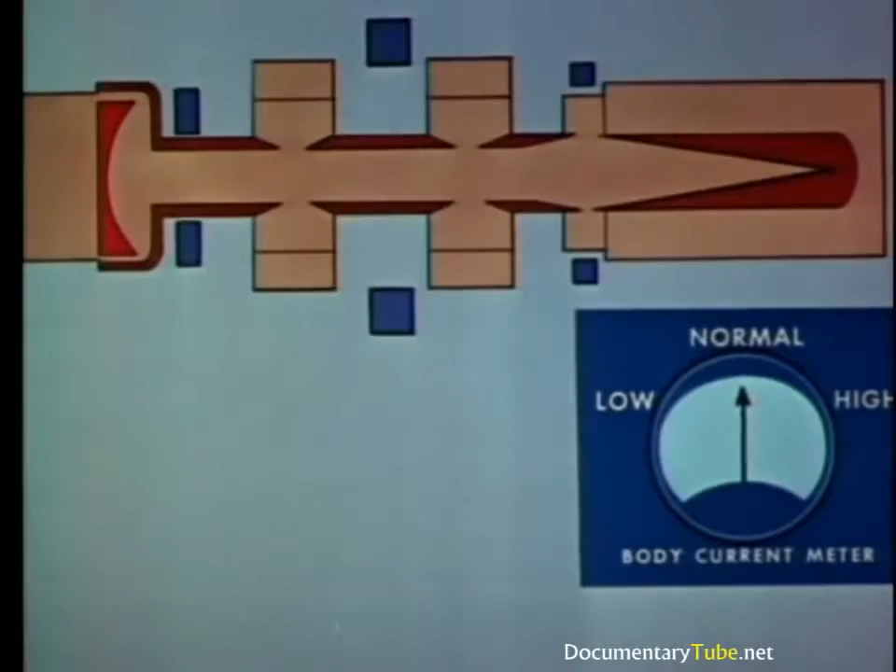Since electrons in the beam have like charges, they repel each other and tend to diverge, to be absorbed by the walls of the drift tube sections. But electromagnetic coils placed along the tube align them into straight paths. However, misalignment of the focus coils can seriously damage the drift tube tips. Therefore, it is most important to adjust the magnetic coil currents properly during installation of the tube.

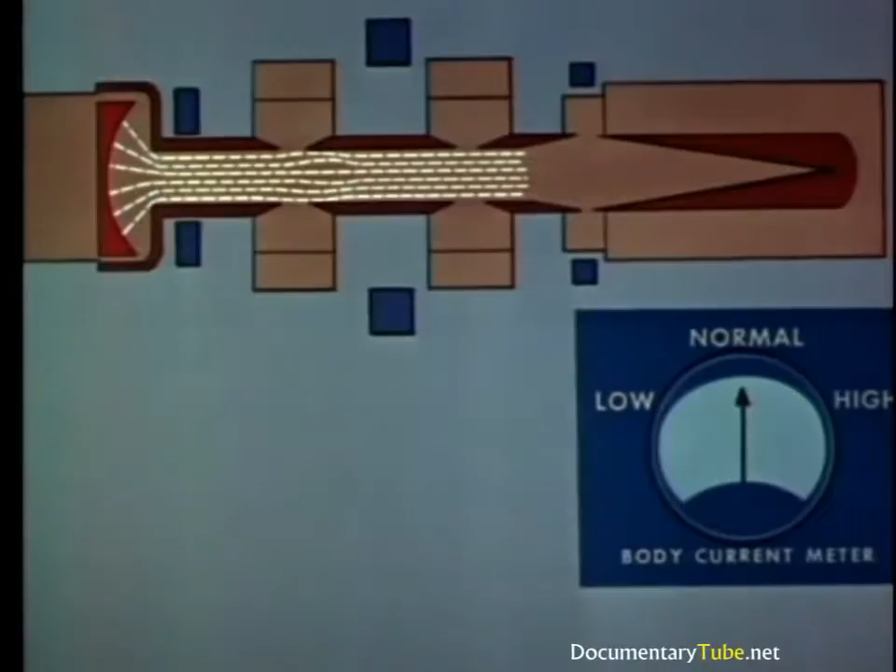When a steady direct current is flowing through the tube, an RF signal from the RF driver stage is introduced into the first cavity resonator. As the cavity is tuned to resonance, a strong RF field appears between the drift tube tips, which form a gap in the resonator.

The electrical charges on these tips alternate at the driver frequency rate on opposite sides of the gap. At the same time, individual electrons in the beam are being accelerated or decelerated at the RF frequency rate. This produces bunching of the electrons as they approach the gap in the second resonator. There they are decelerated and release energy. The resonator converts this energy to RF energy and amplifies it.

Additional resonators are sometimes provided for greater amplification. From the last resonator, the amplified RF signal is coupled into the waveguide and transmitted to the antenna.

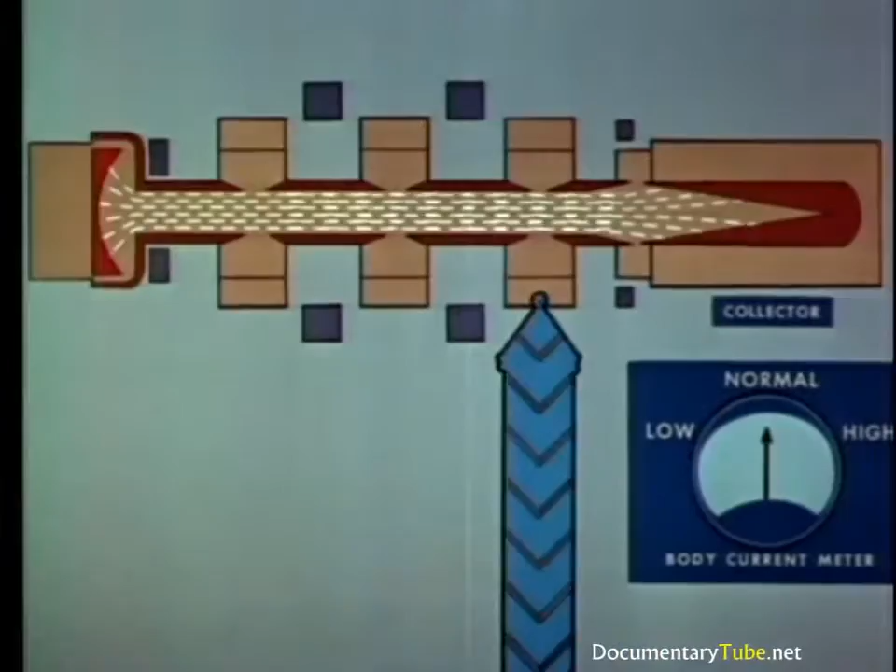Various kinds of klystrons are being phased into new Air Force applications, such as these tropospheric scatter communications transmitters. In this way, intelligence may be relayed from remote early warning sites to control centers many hundreds of miles away.

This transmitter has dual equipment. One transmitter operates while the other is on standby in case of emergency. The equipment is automatic. Meters and instruments keep a constant check on its operation, and a warning light flashes in case of trouble.

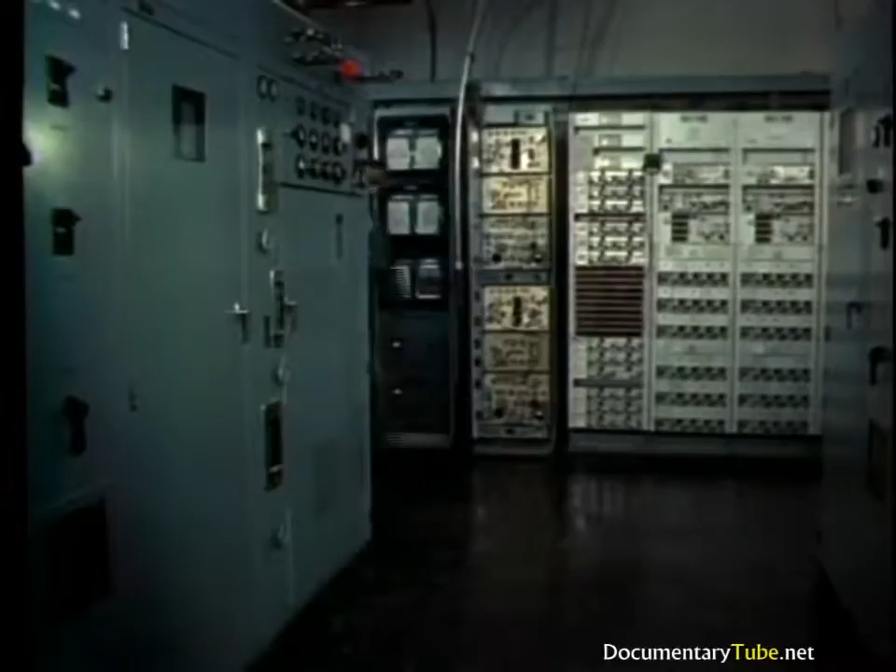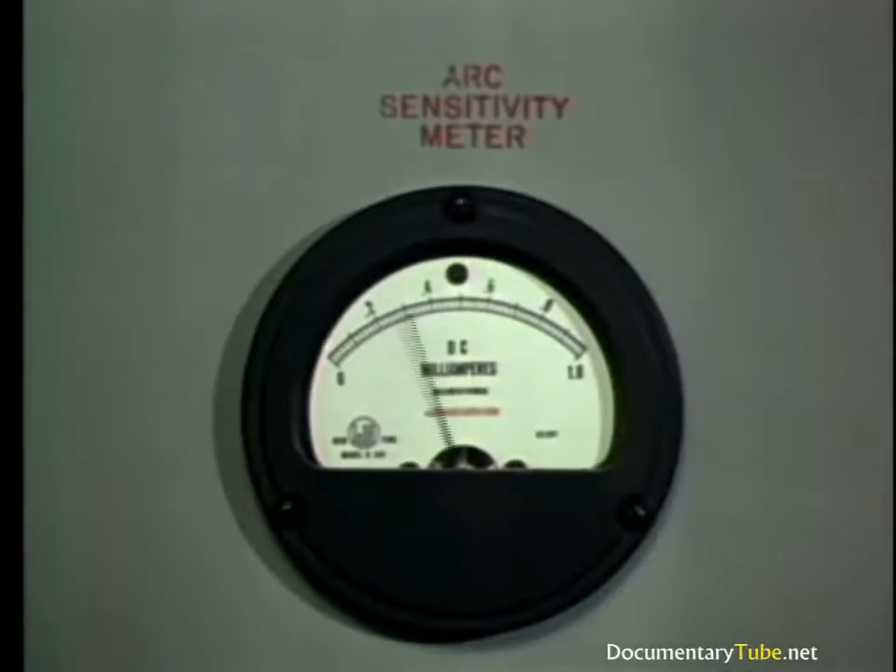Readjustment of the output cavity and coupler may correct the trouble, but the arcing continues. Since adjustment won't correct the trouble, all they can do is shut down the transmitter for repair and switch over to standby.

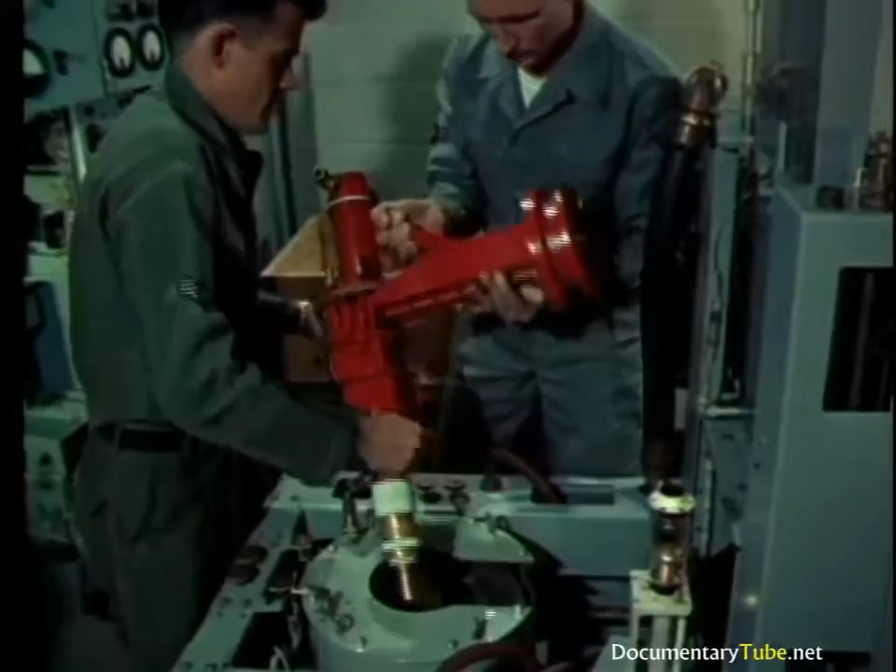The klystron has been removed for inspection. It may have been damaged by the arcing. Yes, the output ceramic is badly damaged.

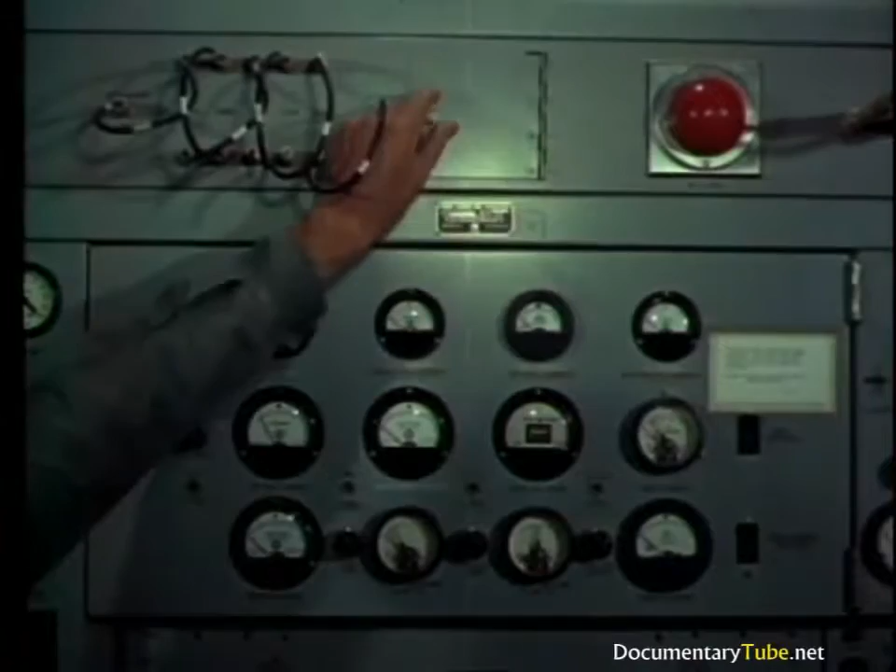An important consideration in maintaining the klystron is the proper adjustment of the impedance matching unit. In this case, improper adjustment of this unit during installation ultimately caused the arcing in the output section, which in turn destroyed the tube.

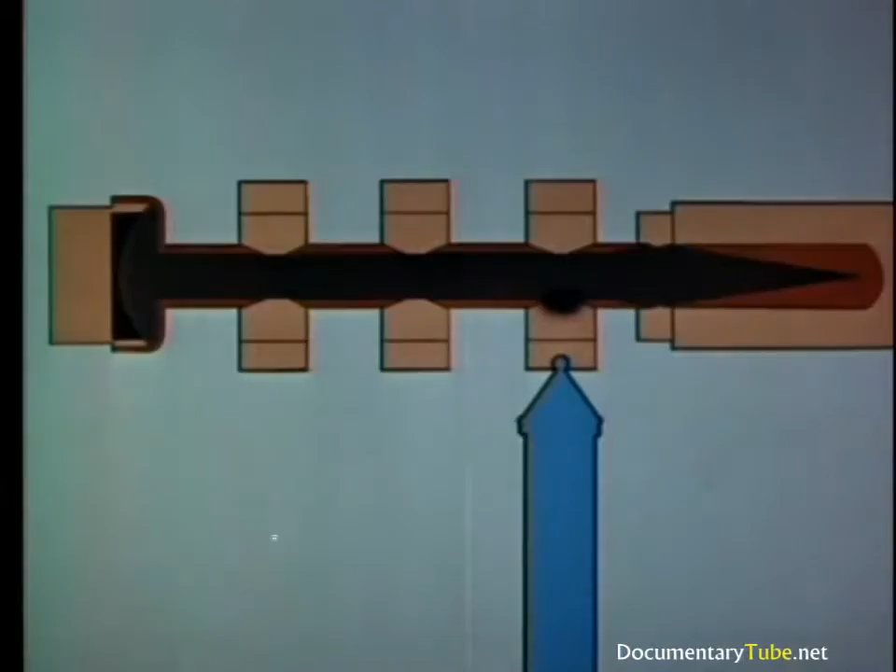There are two types of meters which help maintain proper coupling: the power output meter and the VSWR, or voltage standing wave ratio meter. These measuring devices should periodically be checked for accuracy.

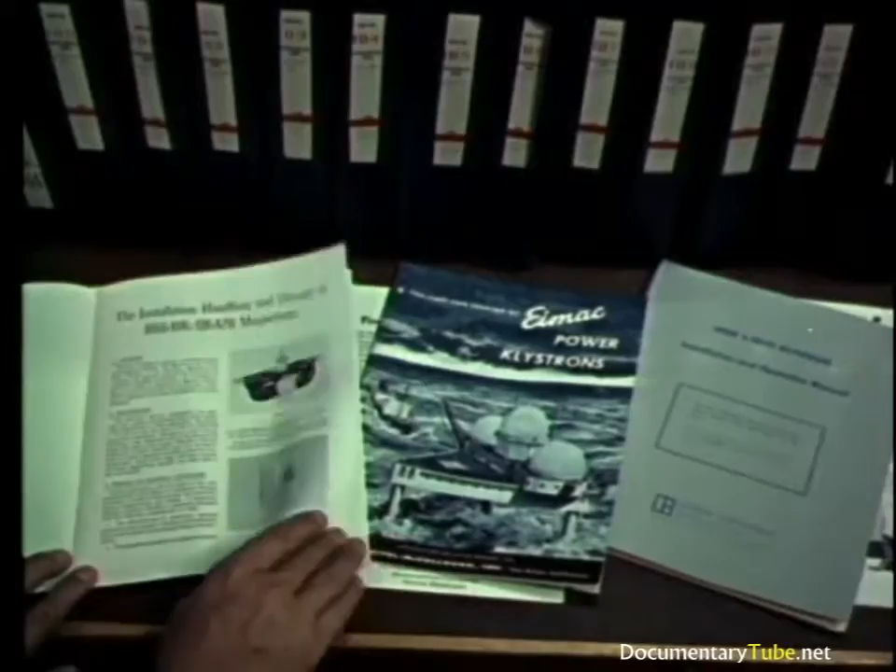But in general, the best way to avoid damaging or destroying the klystron is to study and thoroughly understand the various installation and operating instructions furnished by the equipment and tube manufacturers. Only by doing this can Air Force technicians and maintenance men hope to get the full operating life from their klystrons.

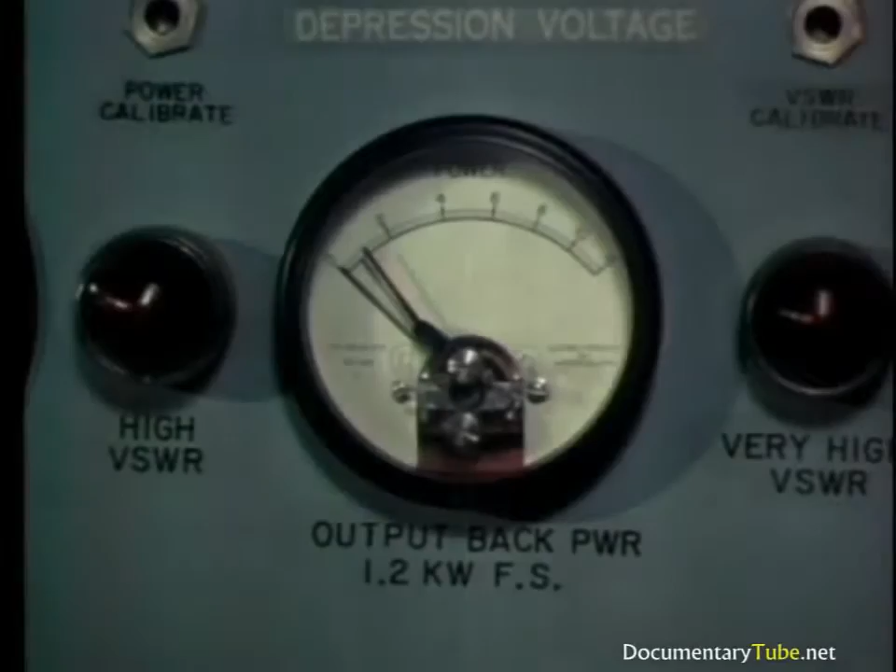At the Tropo Shack, the maintenance men have installed the new klystron. But before operating at full power, they are careful to recheck all circuit meter readings and coolant flow gauges. These meters are important because a minor error in one of the adjustments might shorten the life of the tube.

The power klystron is really a very dependable piece of equipment if properly treated. Once it has been correctly installed and aligned, it requires very little maintenance during its long service life. A good rule to follow is: install it carefully, align it properly, then leave it alone.

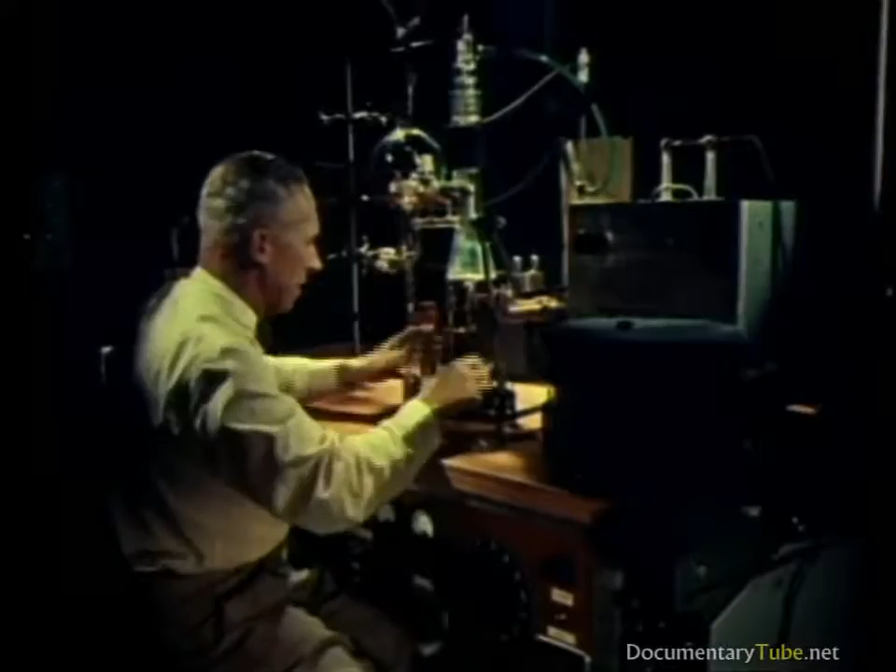As the progress of aircraft and air defense continues, other and more varied uses will undoubtedly be found for microwave power tubes. With these new applications will come new problems to be solved by maintenance men of the future. Those men will tread the paths charted by technicians of today who found that this type of maintenance can be simplified by careful attention to four basic factors: careful handling,

proper break-in, avoidance of tube swapping and trial and error maintenance, and the timely use of maintenance aids such as test equipment, tech order handbooks, and manufacturer's information pamphlets. There is no substitute for know-how, initiative, and ingenuity.

Yet no one man or group of men can do this job alone. Maintenance is a team effort. Only by the cooperation of procurement, supply, transportation, and every department concerned can the Air Force continue to operate the reliable radar equipment which is such a vital part of national defense.

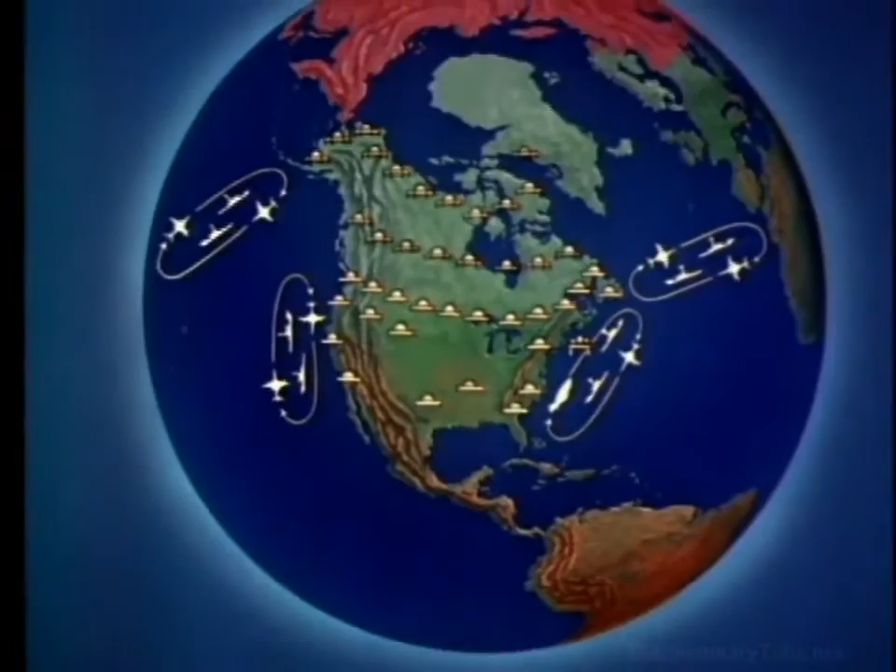Only by continued teamwork and devotion to duty can the radar eyes of America guide us to that peaceful tomorrow, which is the reward of nations who stay alert today and every day.